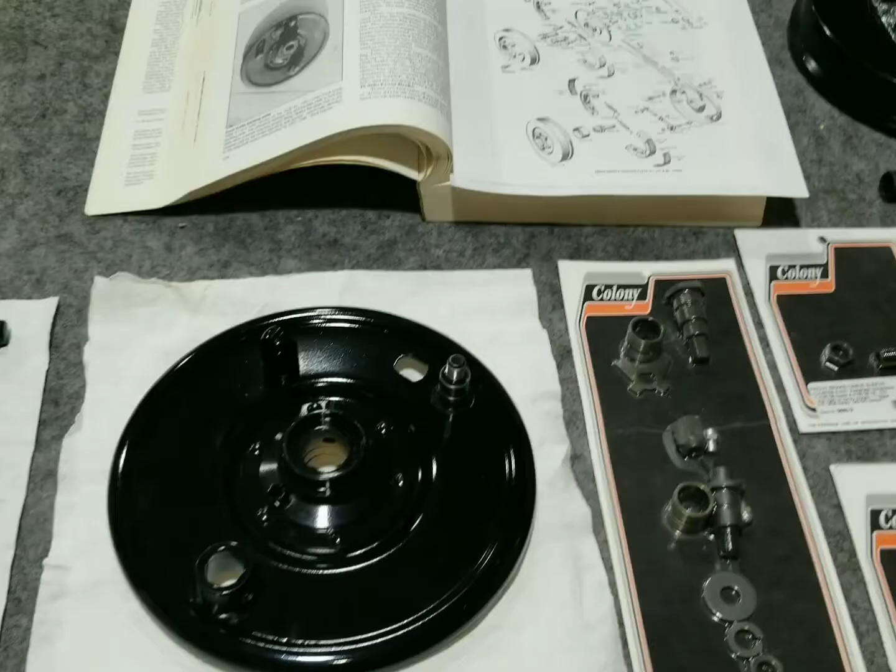Hello, it's Jesse here, and we're going to work on a front brake assembly, mechanical front brake assembly for my 1940 UH. So stay tuned here as we get ready to put this together and get it ready for the bike.

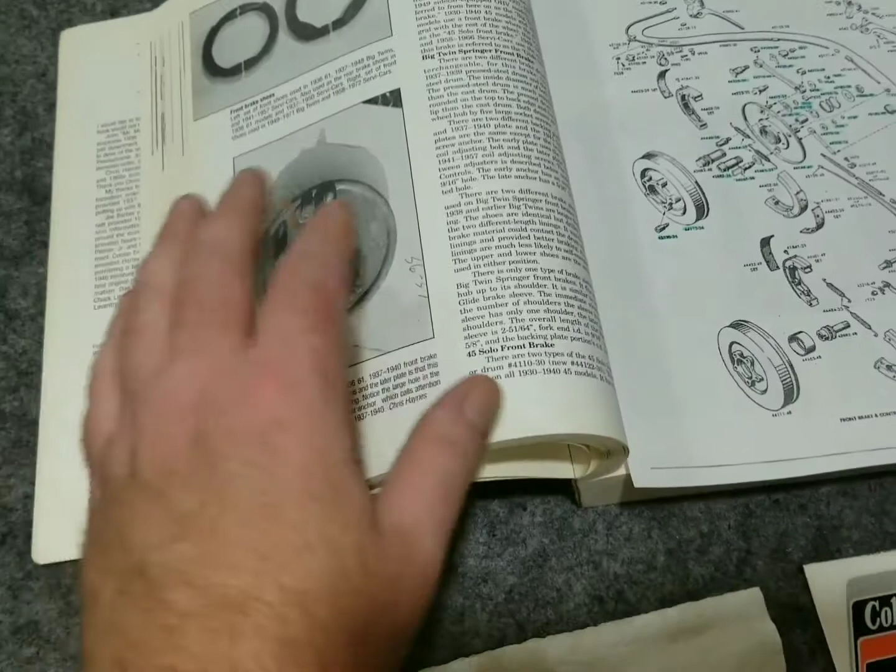Alright, so talking about the parts here, we got the backing plate. This is a repainted 1938 to 1940 backing plate. And the reason why it's 38 to 1940 is because in the Palmer book here, it talks about how later in 38 they added this greaser part here. Because in 37 it didn't have that yet. In 36 it didn't have it either.

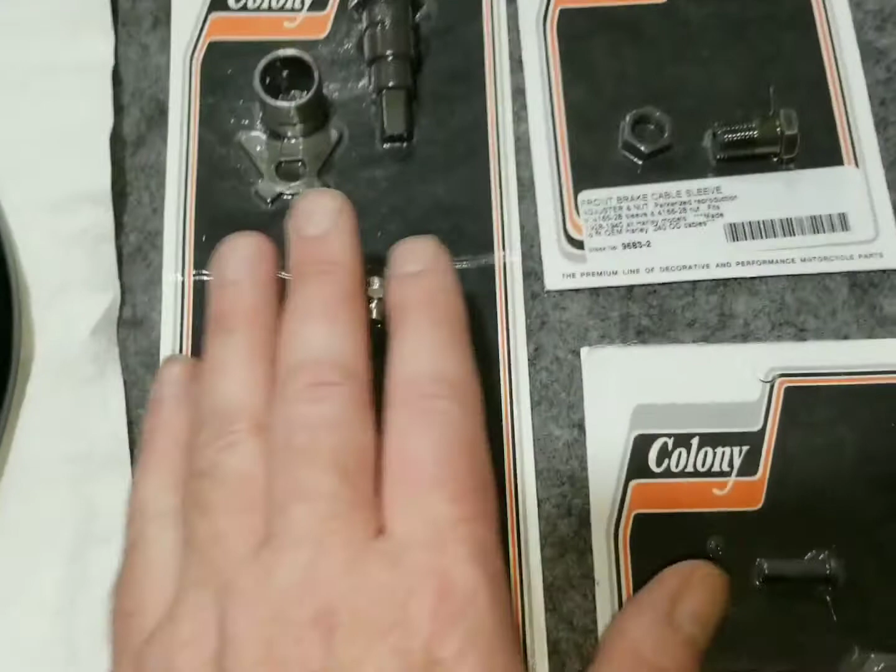But anyway, this is the 38 through 40 because this hole here on the anchor is the large one. There's a smaller one for the late 41 and later because, as we see here in this parts print, this is a 41 style anchor part here for the cable to go through. So the 1940 takes a different one. It takes a larger one here. Got some other Colony parts kits here we'll be talking about as we go through this.

And I guess to kind of overview the parts here, this is the shackle. This is the spring and the seal and washers and stuff that go inside of here. Also we have mechanical brakes, so we have the cam here that pushes the brake shoes open. This is called a mechanical brake because it takes mechanical advantage to make it function, unlike hydraulic brakes, which take fluid to make them function through a piston. And those are usually called juice brakes or whatever slang term you want to use.

But mechanical brakes are the same kind of brakes that are on semis and stuff, where they take an S-cam on the air brakes that opens it up and then closes when the mechanical air brake drum functions. But anyways, this is a little bit different, of course. It takes a rod that functions the cam, which is pulled by a cable. So anyway, we'll be going over this as we build it.

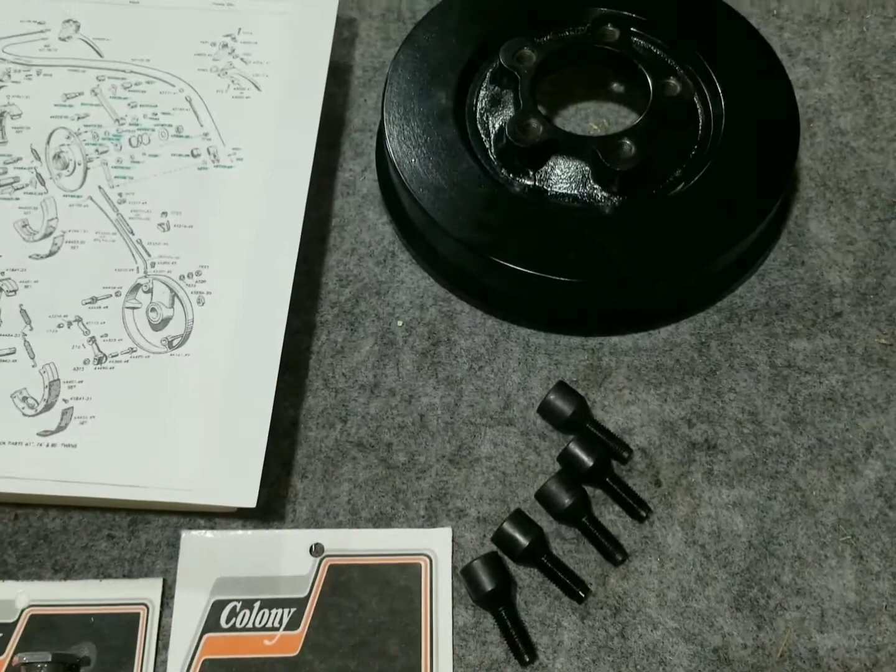And then I got a new replica drum because the one I had was gone and worn out. And then we got the bolts here that hold it to the star hub, which we'll be building a wheel with later in a different video for this front, with the rebuilt star hub wheel.

So anyways, let's get started here. First of all, we're gonna work on putting the mechanical stuff in, like the pin here that goes here for the bottom part on these. This is actually considered the top though, but I got it sitting towards the bottom, so it'll sit in there like this. It pivots on this pin here when it functions. So when this thing rotates, it presses it out. So anyway, let's get started here.

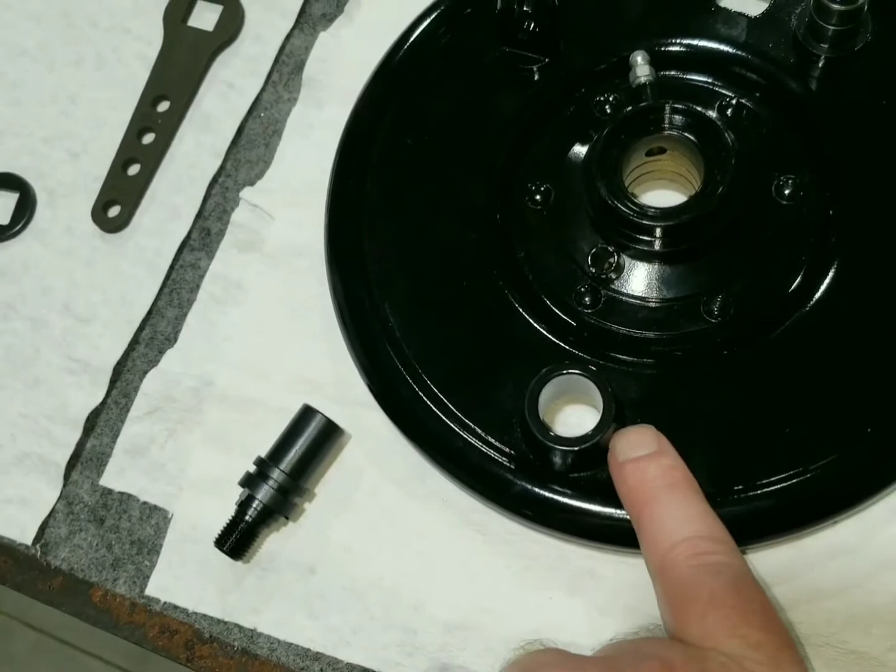Alright, so we'll start off by just putting these grease zerks in here. We'll put the one in here like this. This is the cadmium one, replacement, reproduction by Colony. And then we have one down here on the operating shaft bushing housing. So we'll put that one in there.

Now when I put the new bushing in though, I had to ream it a little bit so I could get this operating shaft here to actually function inside there. Goes the other way though, but just showing you that it cleaned out. Got a little overspray inside here, so I cleaned that out too. And then we'll just flip it over here. So I got all the parts highlighted that we're going to be using here. It's also another guide for me to keep track of all the components I needed to purchase so I could rebuild this front brake.

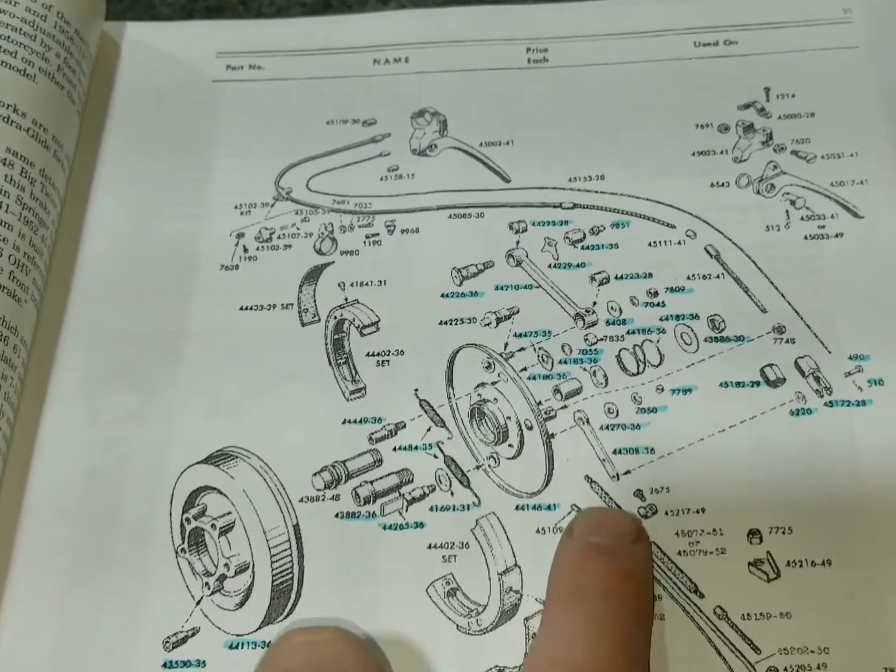So, seeing how we're starting down here with the cam, and then there's that brass washer that goes there, and it goes into the plate. Then from the other side we get the lever, this style washer, spacer, and then a lock washer, and then the hex nut. It's all Parkerized parts for 1940, so keep that in mind. It also tells you which way to put it on. The outside, of course, is pointing to the outside of the backing plate. So there we go.

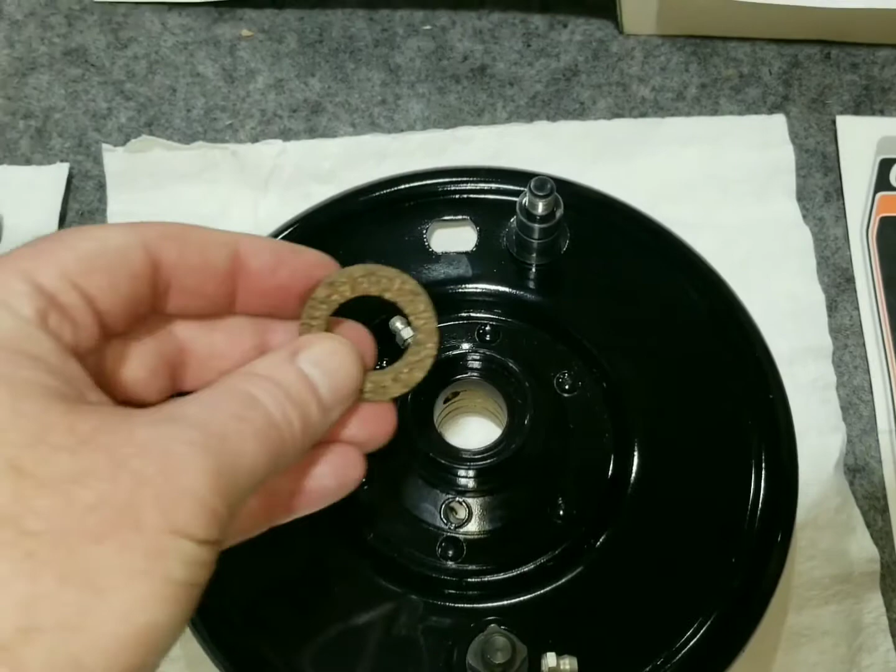And then I'll flip it over. We're gonna leave this stuff kind of loose for right now. There's some stuff I won't be totally assembling at this time, because it has to happen later when we put the axle through the wheel, like the spring that goes on the outside here, and the big washer, and of course the cork seal that keeps all the grease inside there. So, anyways, it just goes on like so.

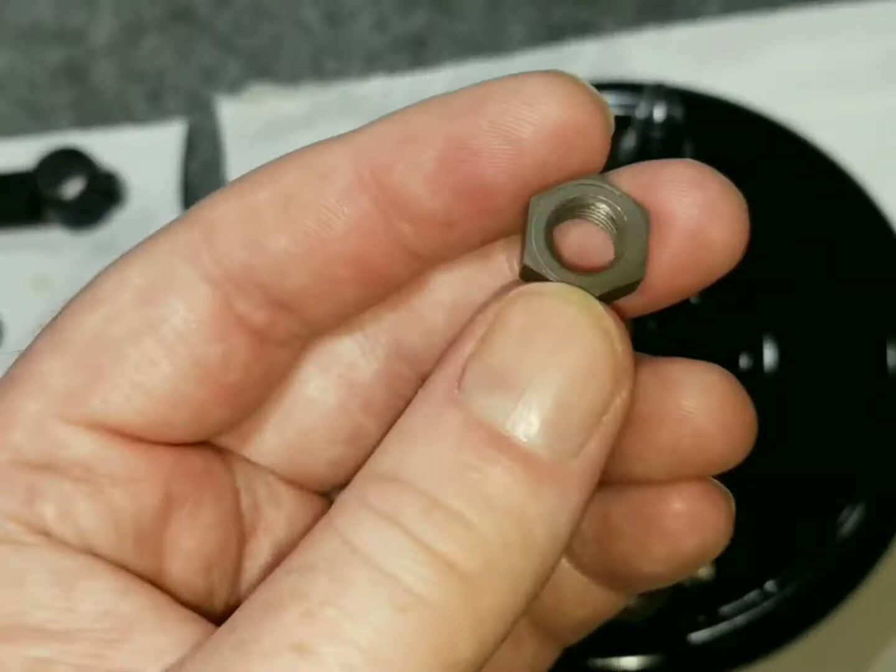And then we put it on; it's kind of a little bit of a press fit on this one, and then we put the lock washer on and the hex nut on. Of course, this has a machined surface, a built-in washer in it. We've talked about these before in my other videos, but that goes towards the component you're tightening down, so that would go towards the lock washer, of course. We'll leave that somewhat loose for now. There we go. And now we'll move up to the pivot pin here.

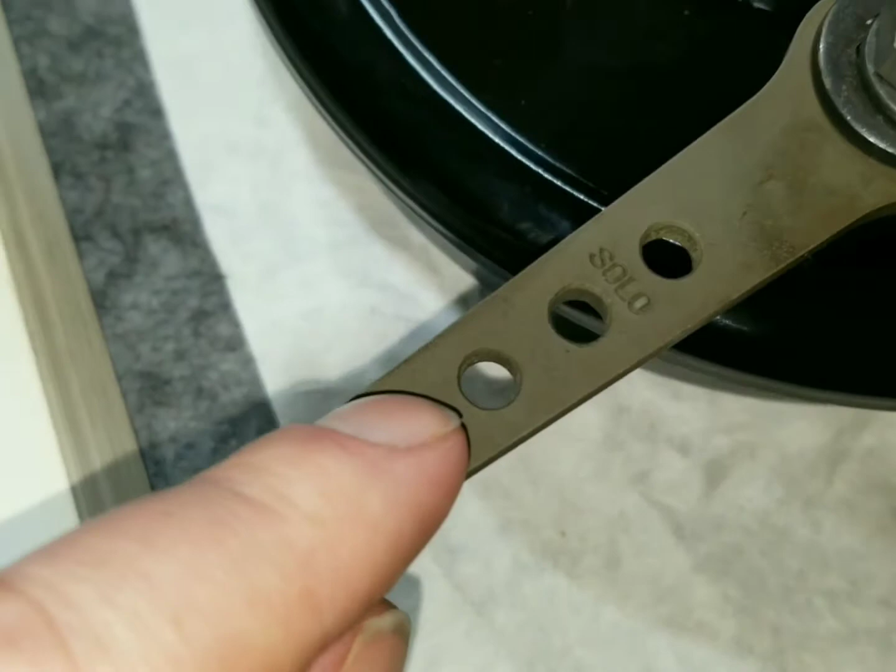The front brake actuating lever. I kind of forgot to talk about this. I just got carried away with putting it together. So this is the early style from 36 to 1941, big twin one. It has the 3 holes for the solo area here, and then the sidecar one on the very tip here. Now this is a real original one, Parkerized, and they all were Parkerized, but anyways, this is how you can tell: the script. Aftermarket ones don't quite look like this.

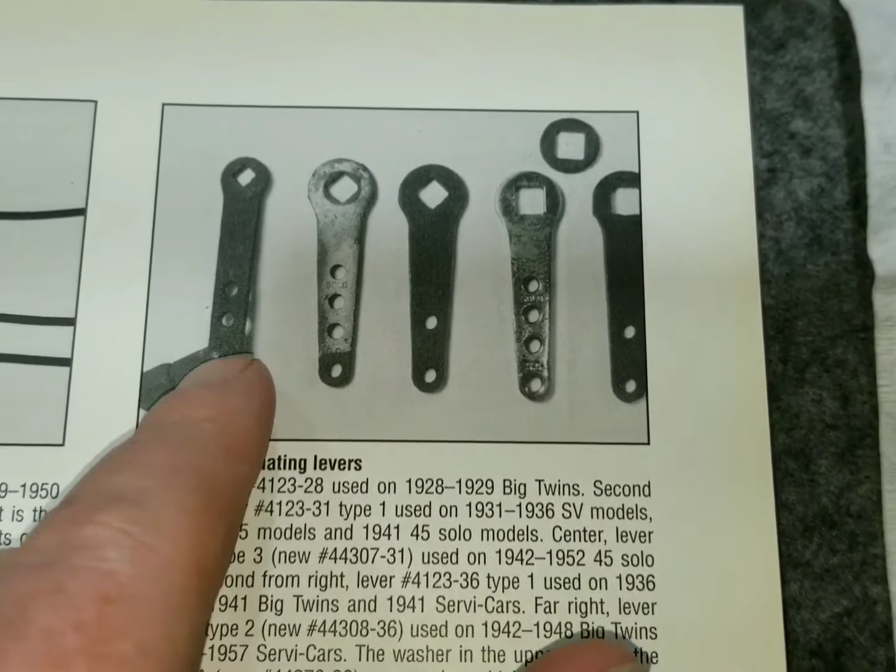What makes them different is the 45 had 2 holes, and the part where it mounts was different. So over here in this Palmer book, we show all the different ones. First off, it talks about how this one here was the 28 to 29 big twin, and this one here was the 31 to 36 side valve models, and 37 to 40 45s, and 41 45 models. See how it's shaped this direction, and how the one we just put on was like this.

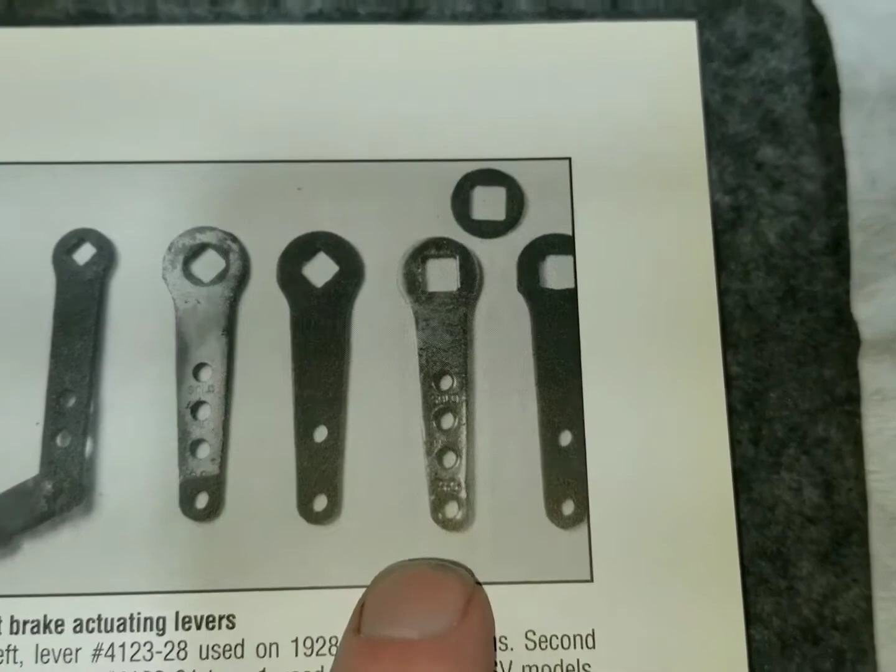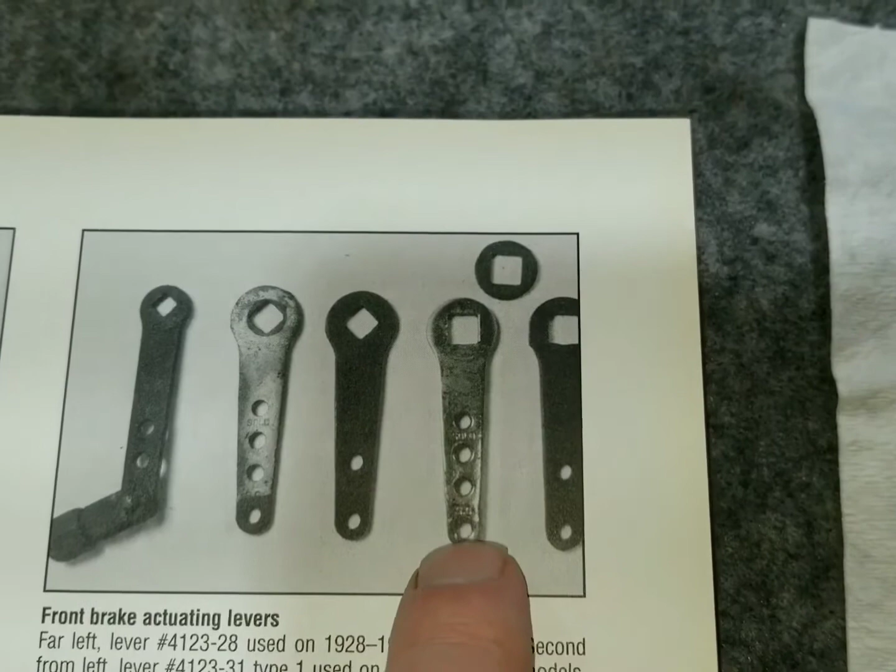Okay, so here we go. We're going to go into detail here. So then the later Type 3 on 1942 to 1952 solos, 45 models, went to this style with the 2 holes, but with square holes and this orientation as well. Big twins, 1936 to 1941, look like this, with the words SC for sidecar, and then solo up here. And the orientation is like this. And then in 42, they went to this style, 2 holes with the same orientation. So anyway, that clears it up a little bit. I just thought I would mention that since I forgot to.

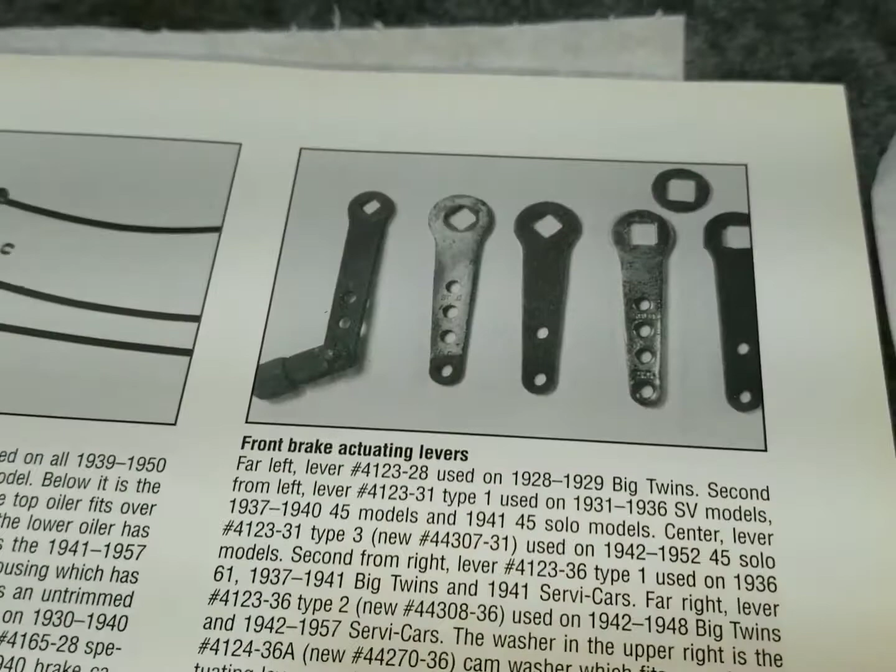So the whole purpose of having the holes is that you can adjust stopping power with this front brake. So we have the ability to put the lower connecting unit, pin it in here, in any position you want, for the amount of stopping power you want. A lot of the times I would see some of these bikes out there with it at the very tip here to have full power out of this front brake, because it doesn't hurt to have a good stopping front brake.

So what happens is we put that retainer piece in here, thread in the cable, and then the cable itself comes down here and hooks to the lower connecting unit, and you'll see all this go together when we start setting it up. I think I'll probably end up setting mine somewhere around the middle, and then I'll probably end up moving it someday out to here, because then I have the option. But anyways, that's all I really wanted to say about that. I forgot to mention it. So stay tuned as we keep moving along on this front brake.

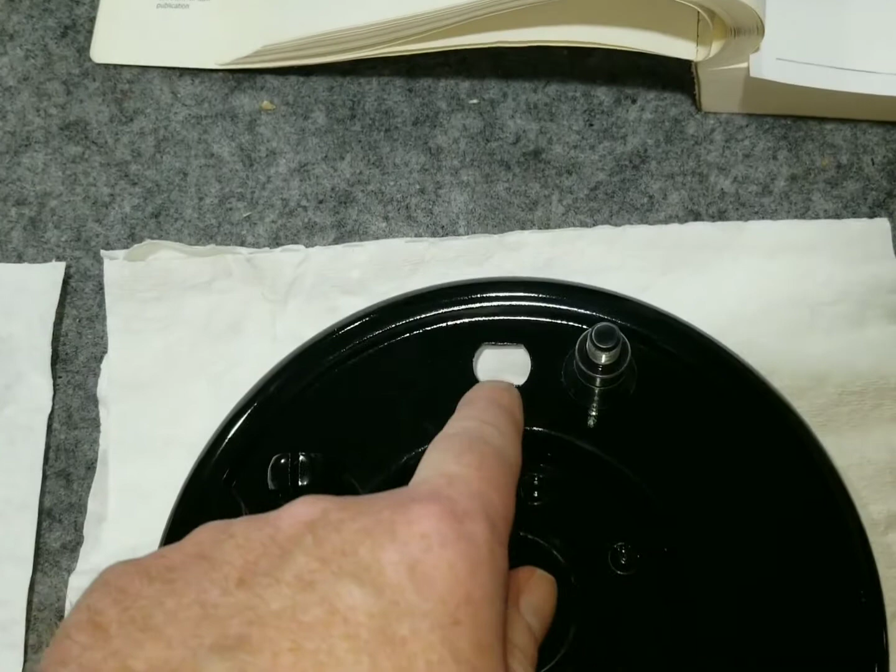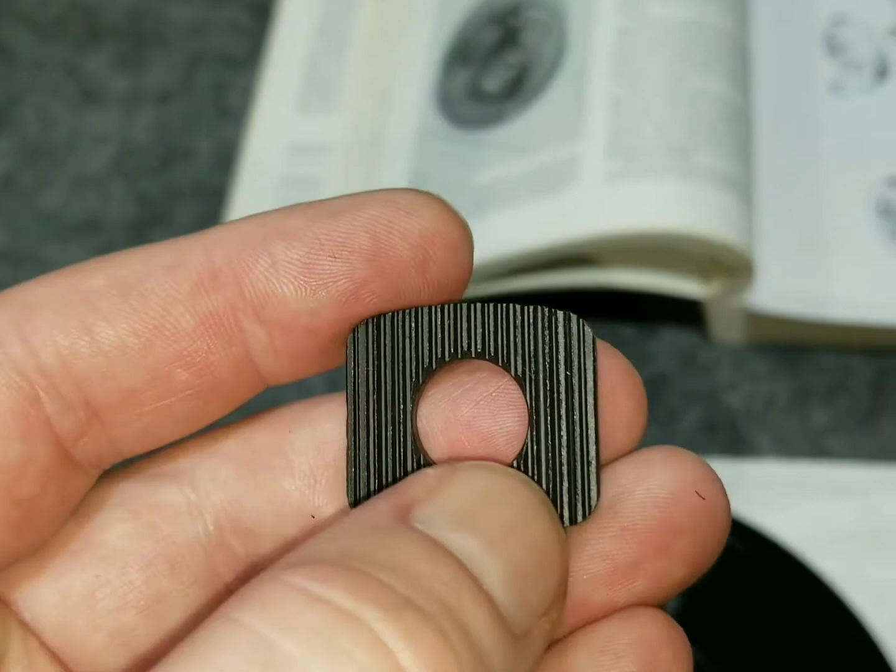All right, so for the pivot pin, it has an elongated hole here, so it's got two flat edges and two curves. This is the same way the pin is made too. It's got two flat edges and two curves. So just put it in like so, and then rotate it till it falls into the grooves like that. And then we have the locking plate. The locking plate has grips on it to help tighten it up to the surface here. So you just put the gripped or grooved edge towards the plate, and make sure it's nice and centered in there.

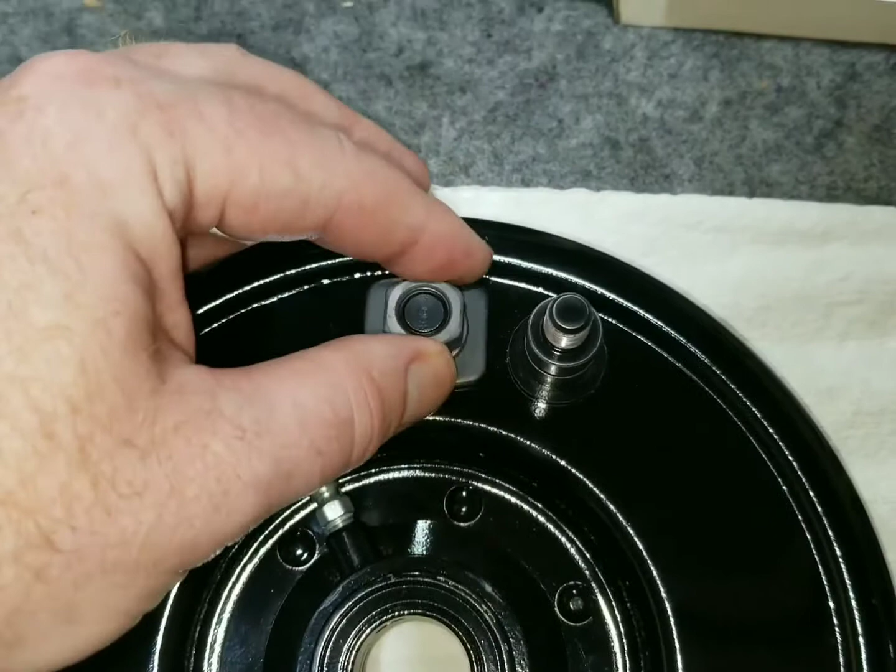Then we put the lock washer down, and then the hex nut the same way, machined edge down. We'll just engage it a little bit for right now. I'm not sure if I'm going to use Loctite on these or not. Maybe I will. I'll put some blue Loctite on when we go to tighten it down. And then we'll flip it over. And now we set up the shoes. All right, so stay tuned.

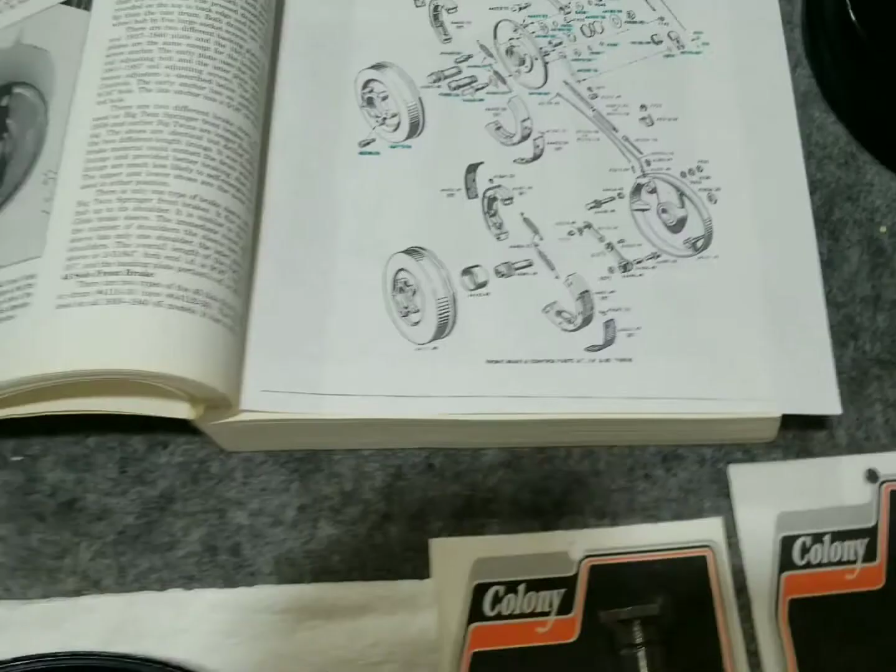Okay, so I'm with the brake shoes here. We got the springs here. We got one end of the spring hooking upward, and then the other end of the spring hooking downward, and the same with the other spring on the bottom here. Now we're going to set it up just like that, and the factory book here shows it that way as well. So we're just going to do it just like they did.

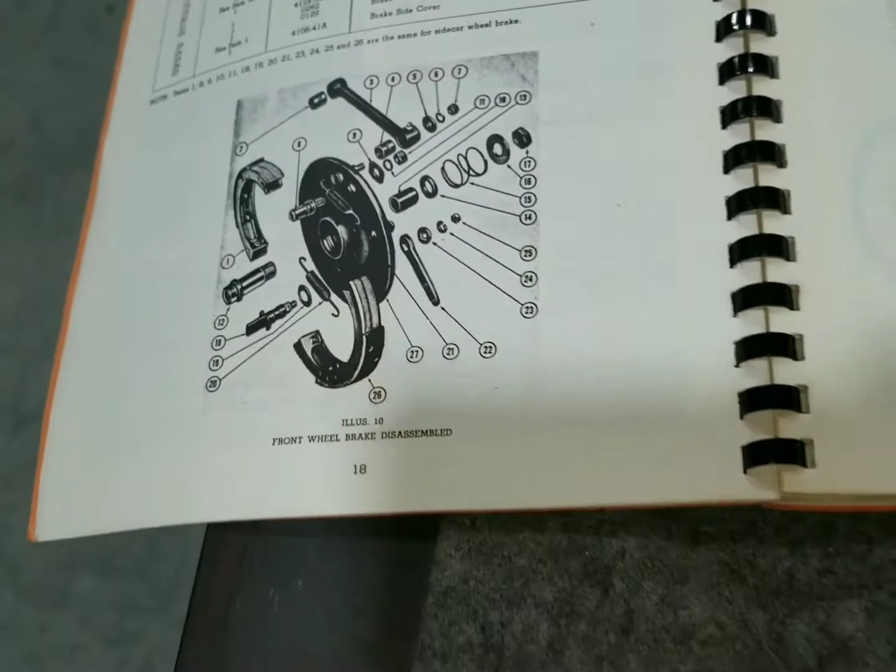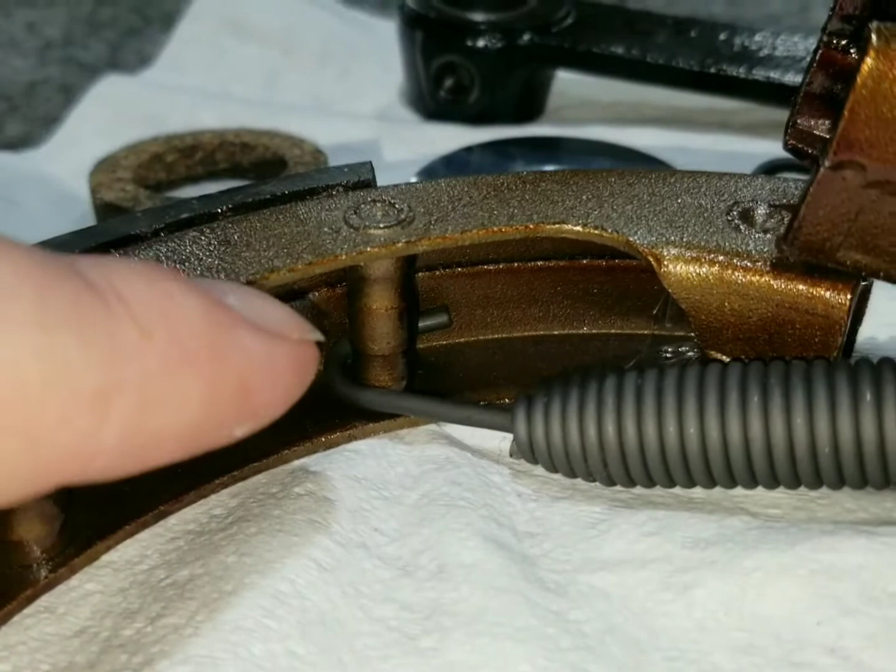So we'll do this side going down, and then we'll bring it over and hook it up on this side going up. Now inside there, where these hook to, there's little indentations where the spring hooks into and sits. Make sure it's fully engaged on that one, and the one on the other side matches it. Otherwise it would pull kind of crooked.

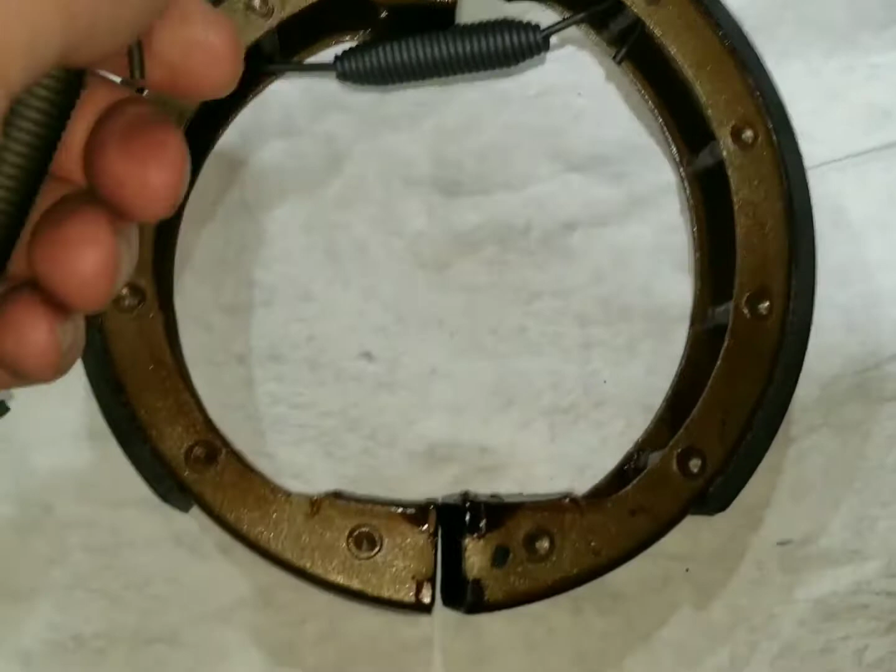So now same with the bottom one here. We're going to go opposite. So we're going to hook this one on this side from the bottom going up, and this one from the top going down. So I'm going to bring it in closer here. There we go. All right, now we just spread them apart and put them on the backing plate. So stay tuned here.

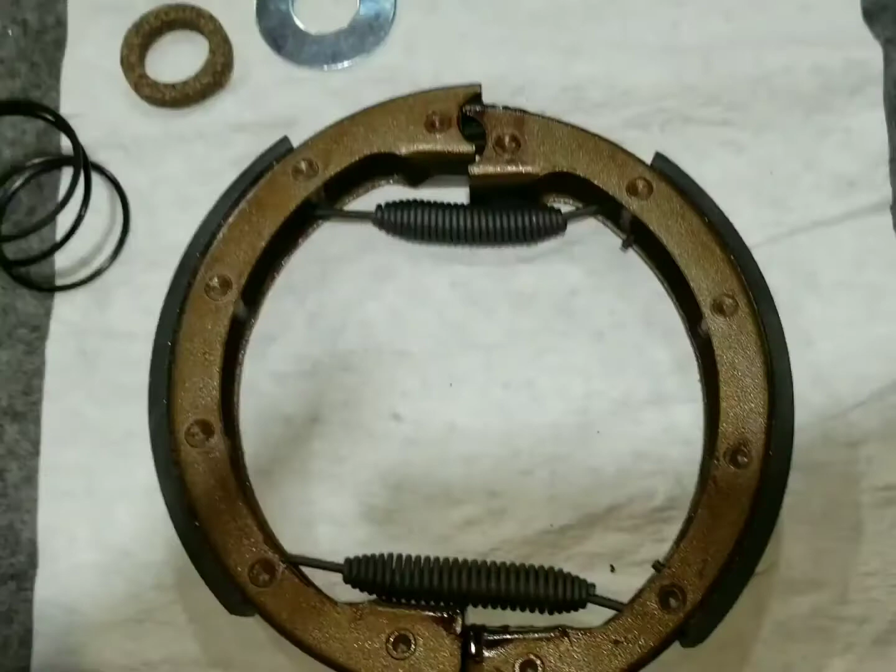All right, so all I did was use both my hands, and I pull them apart so each end could touch here. And then we'll work on it again with two hands, and we'll take it and set it onto here. Now on the top here, it's got an indented area where the circle part goes around this.

So now I'm going to make sure that one of these edges, the back edge there, engages in this groove right through there, and then the other top half moon sections here will be flush on the top here. It's got to be in that groove. We got to make sure it's in that groove. And then, of course, this end here that sits on the cam just sits flat up against it. So, stay tuned here.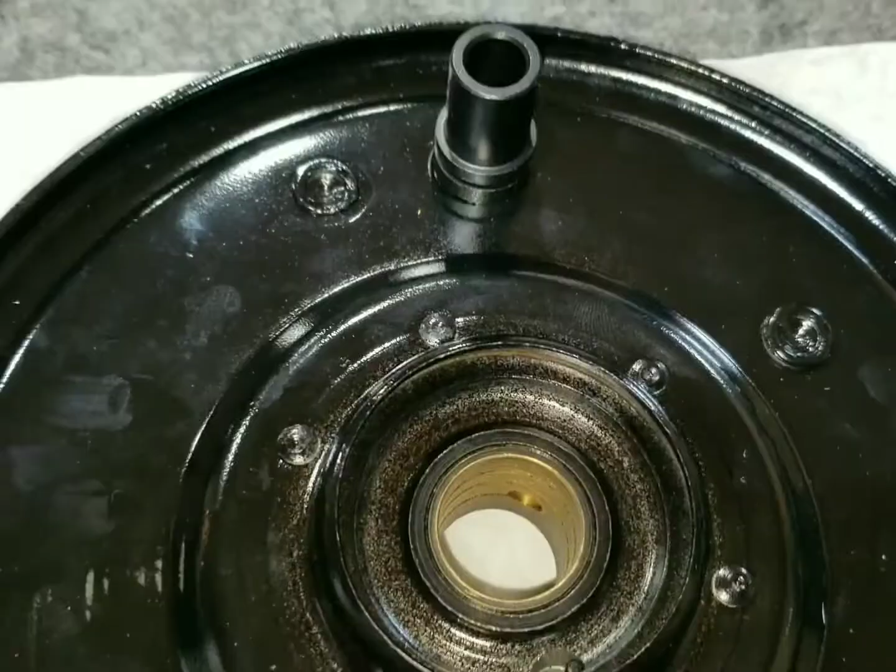Alright, so before we get carried away with putting the brake shoes on, we want to make sure we have some slight amount of grease here, just to reduce the metal-to-metal friction on the pivot bolt here and on this cam here. So we're just going to take a little bit of this moly grease right here and just touch the edges here.

We don't want too much grease on these brake systems, because this stuff moves around and gets on the pads. It can be a real disaster. So yeah, it just won't function. So anyway, here we go. Just to keep the metal to metal friction wear from being excessive.

So later we can come back and we're gonna grease this through the zerks later when we get ready to put it on the bike. We'll hit all the grease zerk points at that time, and we'll get some really good lube inside there. Alright, so let's move on to putting the pads on.

Alright, let's see if we can do this. So, spreading the top apart, going down there, and then we're going to pull the bottom apart here. And then there's that groove. Now we got to pop it down through there. Alright, there's one side, and then there's the other one. There we go. And we got it.

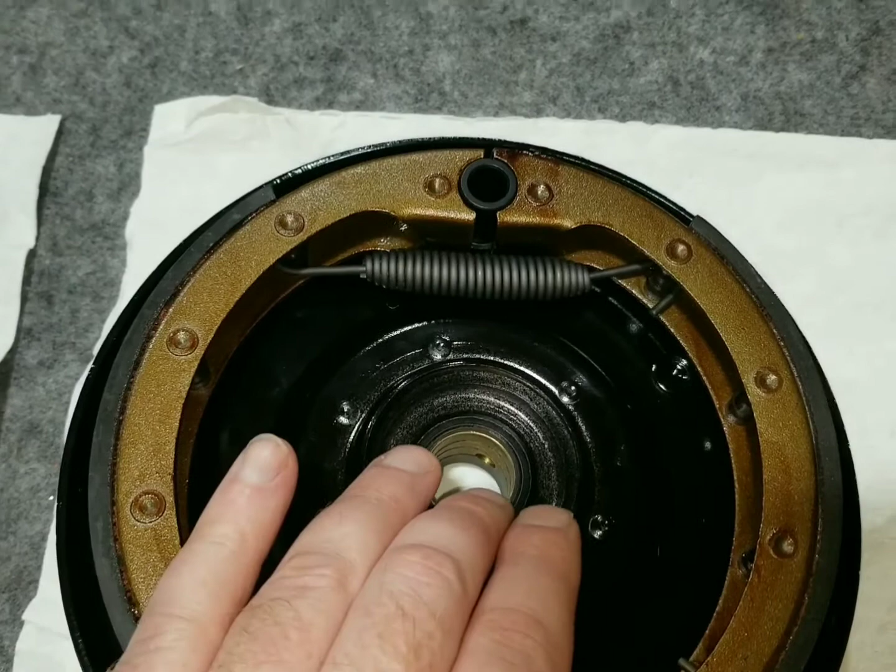Alright, so now that this is all on, we're just going to put the drum on for now. It will just keep it from falling off and all that stuff. So it's not a big deal if we do this or not. It's just that it's going to sit for a little bit.

I'm kind of at a standstill on working on this bike, so I'm kind of doing this, preparing sub-assembly stuff right now in the meantime until the lift opens up, because we got some other stuff going on also. So anyways, there's that. Now we just flip it back over here.

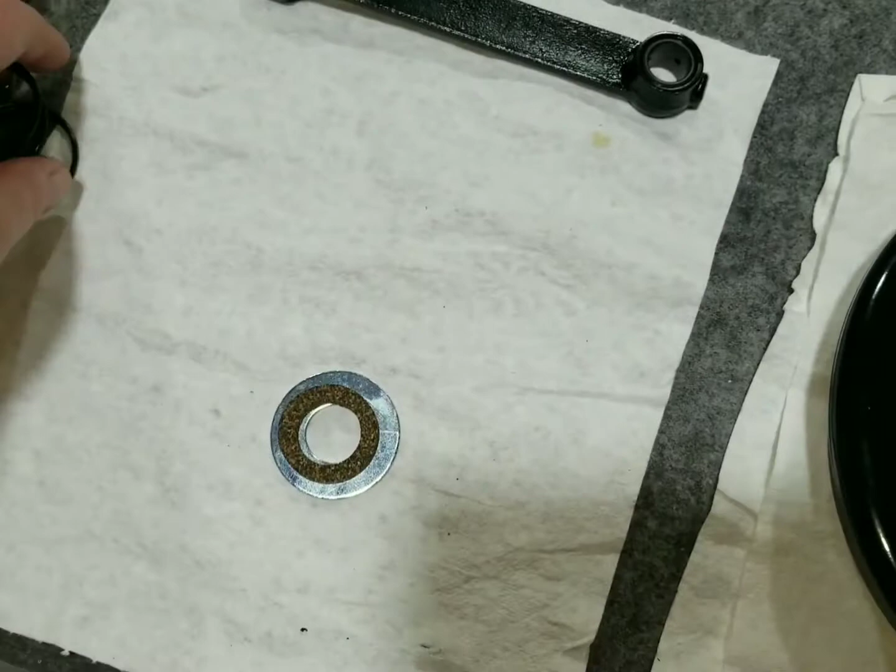Alright, so now we're going to tighten these guys up. Then we'll start digging into some of this stuff here. But in the meantime, these parts over here, I'm going to put them aside for now. Like I was saying, these go on when we put this all together onto the front end, which is hopefully coming up here soon. So anyway, we'll tighten these up, our grease zerks.

Yeah, we'll probably use blue Loctite on the top pivot stud nut, and then blue Loctite, of course, probably on this actuating cam lever nut. So, yep. All right, that's tight. And then we'll talk about some other parts like the shackle and stuff as we get into this. Okay, so stay tuned here. I'll get some Loctite here on these.

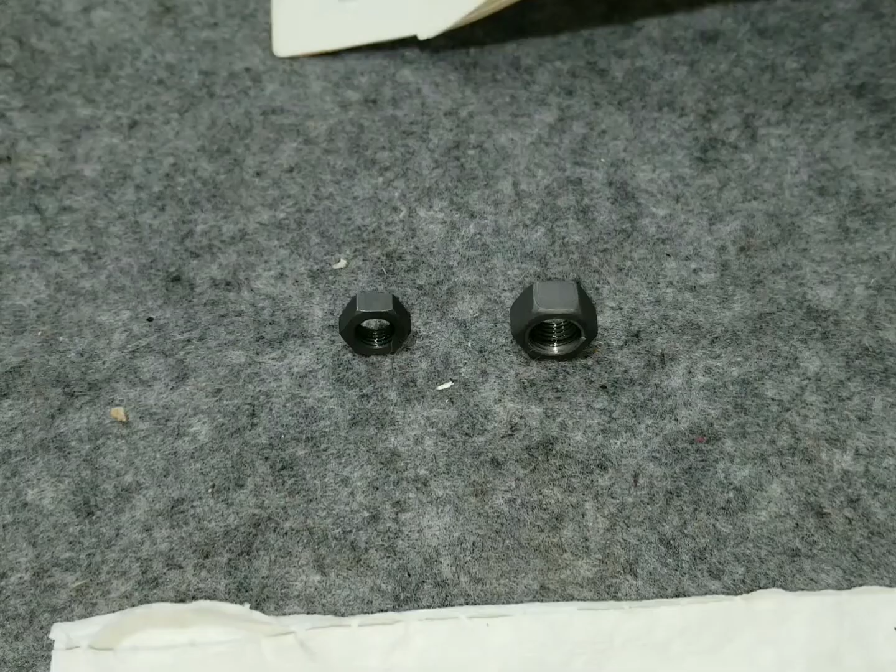Alright, so now we're going to put some Loctite on these nuts here. And the book says to tighten them down securely. It's the original book over here. I think I'll just tighten them down to like 20-25 foot-pounds. And then we got the Loctite helping hold it, so it's not a big deal.

So just make sure you got them on the right way. And then turn them down. And then you got this backing plate, lock plate here. We want to make sure this nice curved edge here on this plate kind of matches the curved edge of this backing plate. So it wants to kind of turn sometimes when you do this. So we'll start off kind of slow here and then kind of adjust it so when it does start to turn, it kind of turns in with this when it rotates.

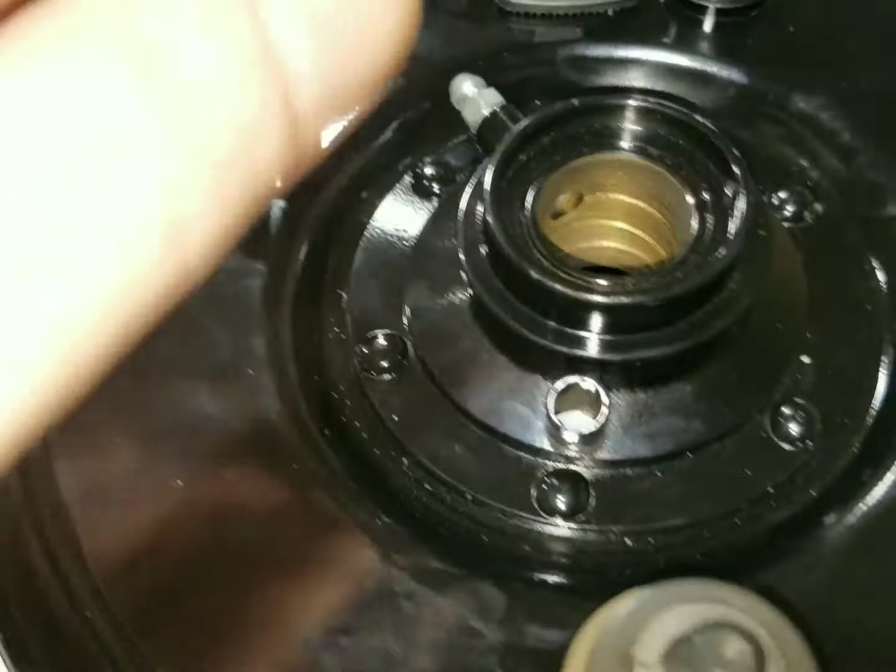I think that looks pretty good like that. Alright. So I was keeping it from turning as I was doing that, holding it and kind of turning the nut at the same time. There we go. Now it's ready to be tightened down the rest of the way. Alright, so now for the other side. Make sure we got it together right. Yep. Machine edged in. Yep.

And then we got that square washer, that special washer that has that square hole in it. It's getting pushed down as we go to tighten it up. And I can kind of feel it going in there. Yeah, it's set in there. Alright, so now I get the torque wrench out here, and then we'll torque it down, and I'll get the excess Loctite off of here.

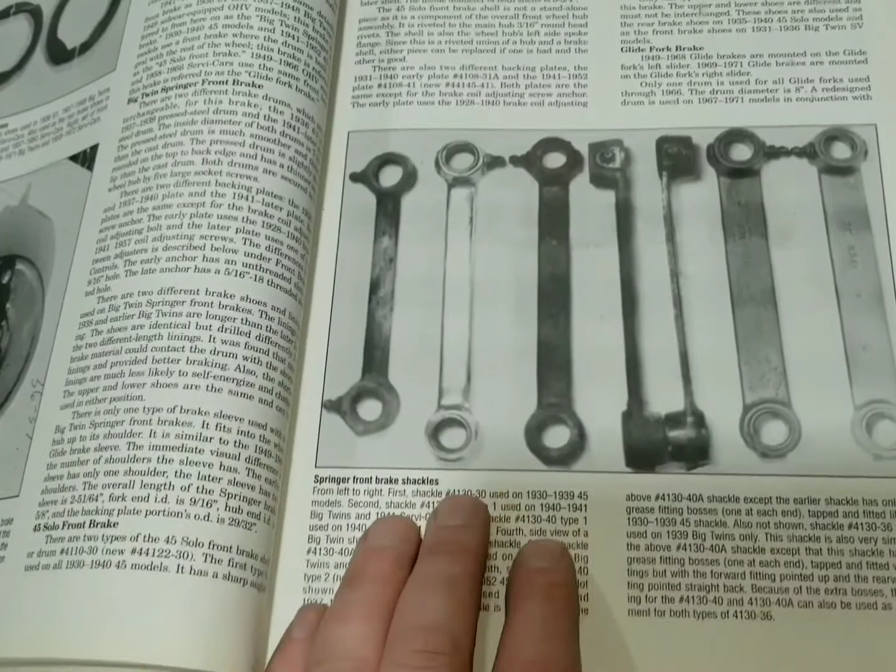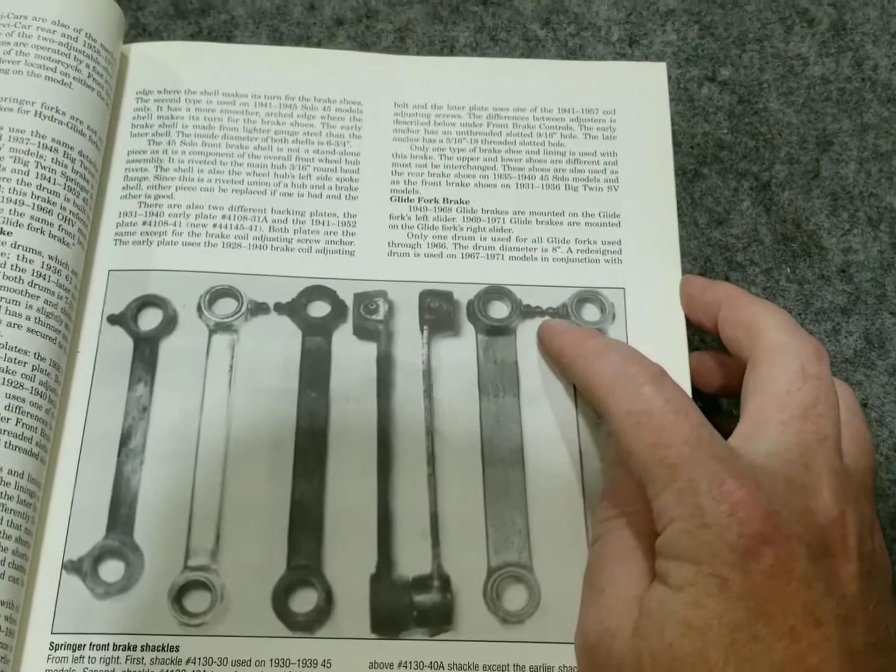Alright, so onto the shackles here as we're working on this front brake. In this Palmer book, there's a segment on the Springer front brake system, and a section about the front brake shackles for the Springer front end. So we got two different styles that were available in 1940. We had the narrow one, the XF-834. It was considered narrow compared to the later one that came out on 41 and later Springers. In 1940, they decided to flip the grease zerk to the top instead of the bottom. So that's why you can sometimes find two different styles.

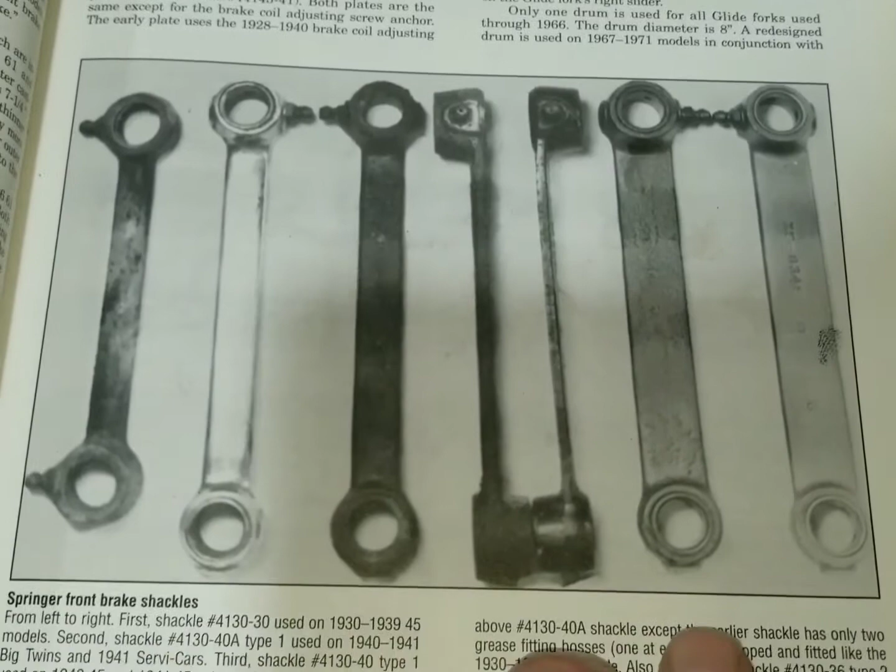It took a lot of research to figure this out, but it was vaguely mentioned in this Palmer book. As I was looking through parts and other documents, I was coming across some stuff. So we have everything listed here in this picture from the 45s and earlier ones. Here's what the narrower one looks like. And this is the 40 to 41 style. And then the narrow one with it on the bottom, this third one in the picture. And it goes on to where the later ones got thicker, like 42 and so on. But for some reason, we had some on the bottom too.

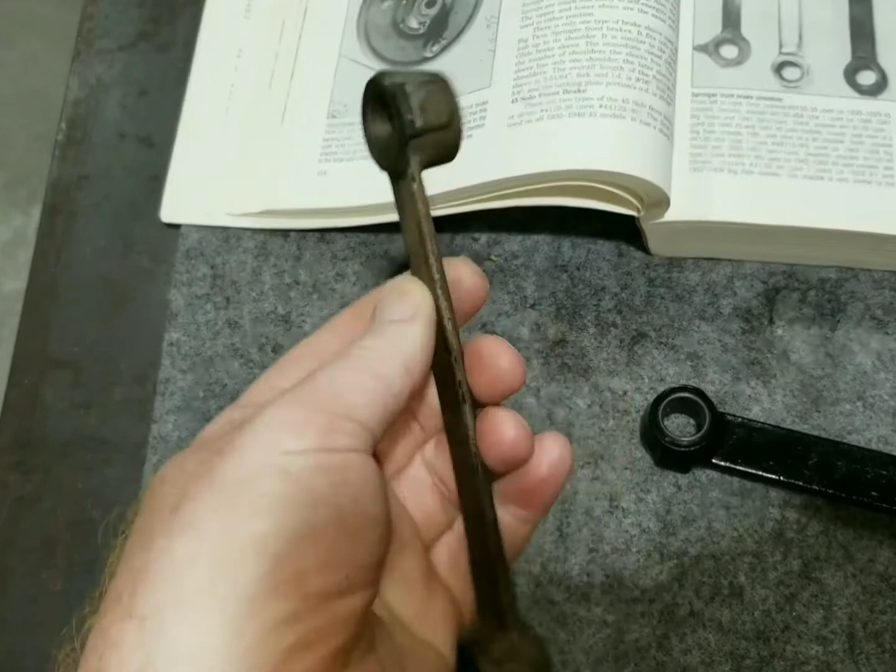So, I got two different ones here to choose from. I got the narrow one, looks like it belongs on my 40. It was with that front end when I got it. I'm probably going to restore this one and use it because it's in really good shape. It's straight, and it's pretty accurate. The bushings are kind of worn, so I'm going to replace them and put a new grease zerk in the top here, then repaint it, of course.

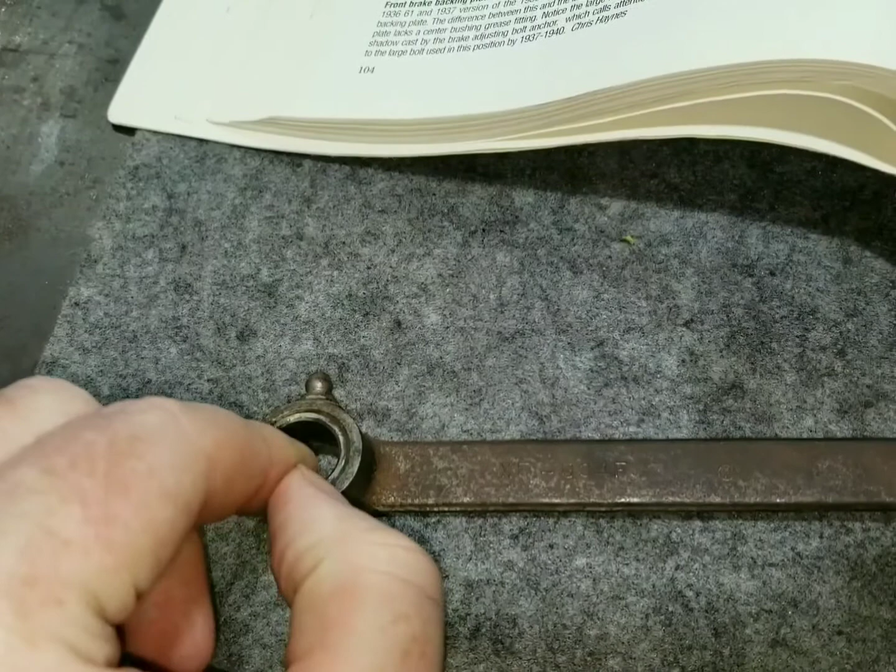And this other one here was the thicker style, which came out later. They're next to each other so you can see the difference. And it has the grease zerk on top as well. What makes this stand out as the right one is that it has an untapped boss on this side for a grease zerk, and on this side it has it as well, but they put it on the top because when it mounts to the backing plate, this would be considered top, and this end mounts to the fork.

We'll be going over that as we keep moving along, but in the meantime, I'm going to work on getting this cleaned up and repainted, and then we'll reapply it later in the video. But at the very end of it, it has an untapped boss as well.

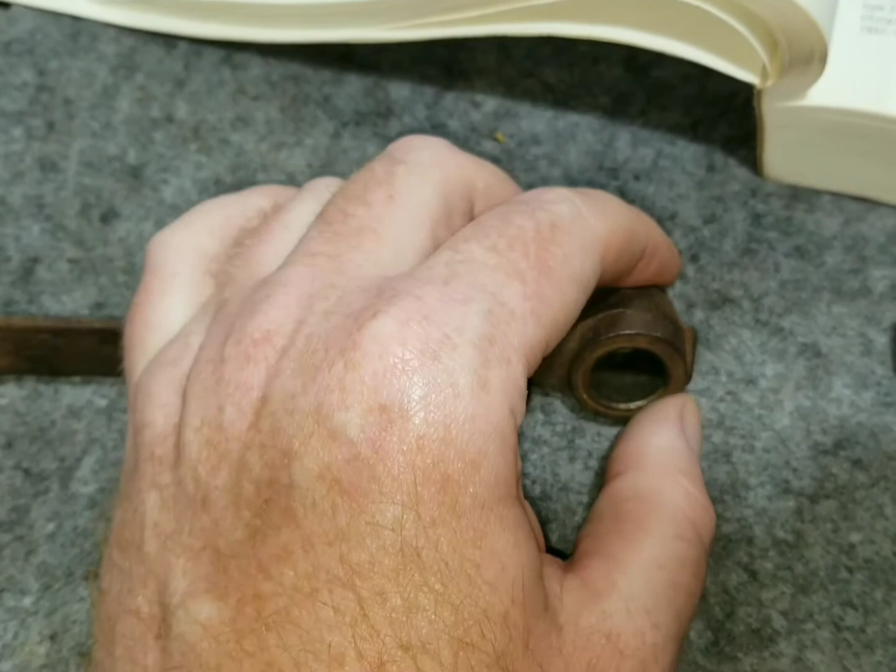Anyways, there's a pin that comes through when it mounts to the front end, and it has a part that screws on. But anyways, we'll see that when we come up. Coming up here, we're going to work on the Colony kit here. I'll have it all laid out. I'll show you all the different parts there. And then we'll get this all cleaned up and get it on the front brake assembly as we keep moving forward here. Stay tuned.

Okay, I have 3 Colony kits laid out here that I just opened up. The first one here is this front brake shackle rebuilding kit. This kit contains everything needed to restore the front shackle on all Springer front ends from 1940 to 1957. It's good for big twins and 45s. In 1949 they were still making the big twin Springer front end for all sidecar models, and then the Springer front end was still on the 45s all the way to 1957.

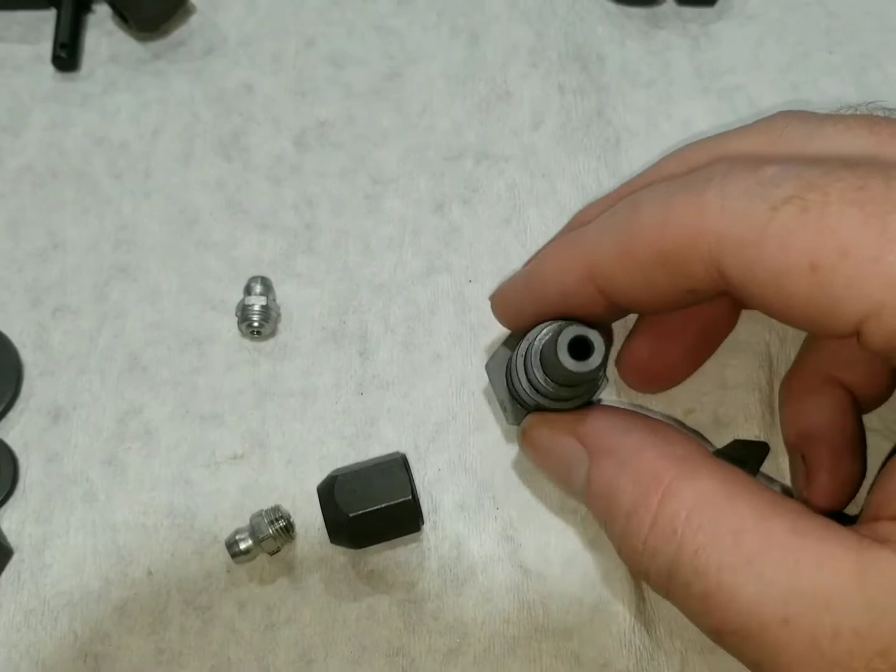This kit contains a flat washer, lock washer, and a hex nut to hold the front part of the shackle on, a new grease zerk for the shackle itself, the hardware here to hold the rear part of the shackle to the front fork. We got a new bolt here in Parkerized finish like it was originally, the nut to hold it down, a grease zerk to go in it, and the special keyed washer that locks it.

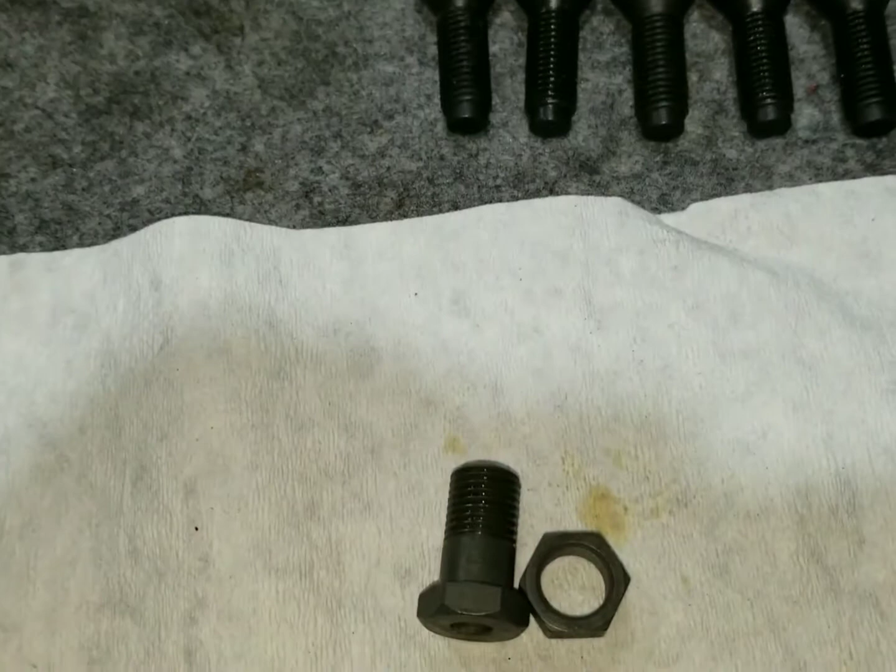So next here in these other kits we have the front brake cable sleeve set, its adjuster, and the hex nut to lock it on the front brake backing plate. This fits all 1928 to 1940 models, because in 1941 they changed it up. They made it a smaller anchor bolt like I was talking about earlier, and they had a whole different adjusting unit. I don't know if it was an upgrade or not. It probably worked better, but this is how the 1940 was supposed to look, so I'm going to put the original stuff back on it.

And the nice thing about this is it accepts the original style Harley cables. It's left-handed. This is kind of a key note here, because a lot of the reproduction cables that you find aren't wound the right direction. They're wound right-handed, and you can't put them in the original equipment. So the cable I got is a reproduction one, but it was a nice USA made one. It was a little bit spendier than those cheaper cables, but it was the way to go because it goes inside here and threads into this, and also threads into my original front brake lever as well.

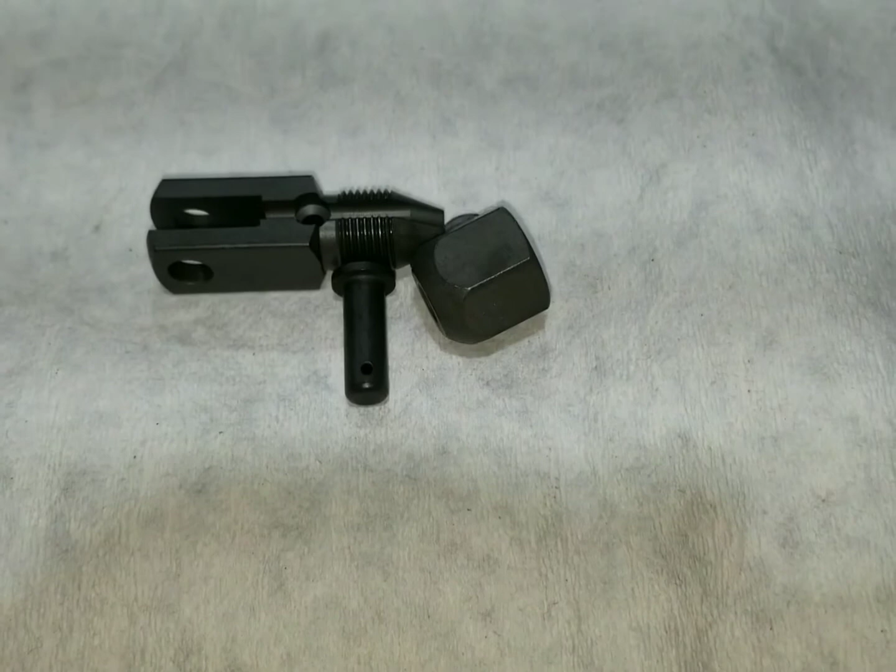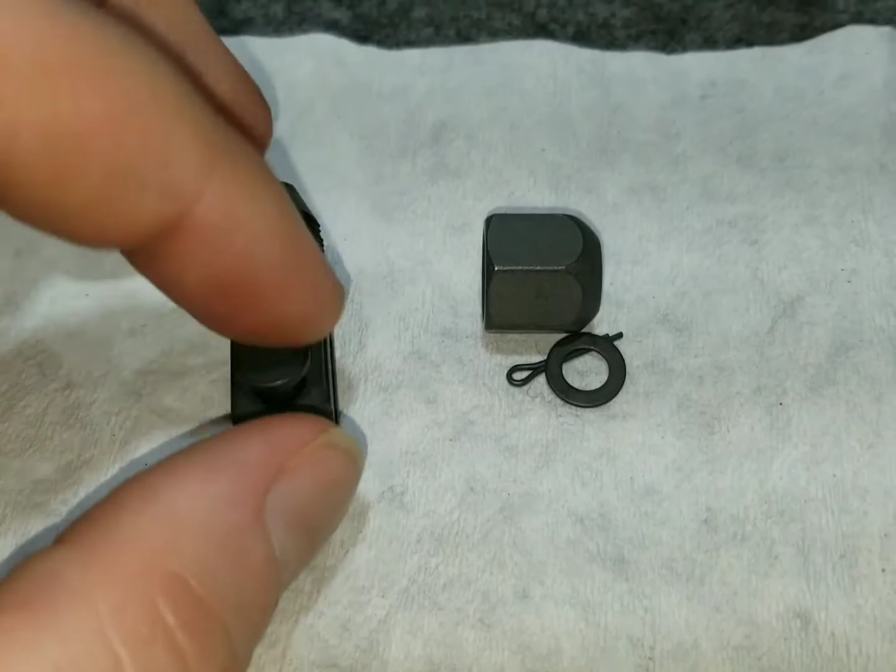So that's really good. And then the other kit we got over here is the front brake control wire lower connection kit. This is a Parkerized reproduction kit of the lower connection assembly used on all 1928 to 1950 45s and 28 to 48 big twins. So you run the wire through here, wrap it around, and you tighten it down with this, after you have it hooked onto the actuating lever using this pin, popping it through, and you put the washer on and the cotter pin. You'll see all this go together as we're working on the bike coming up.

I forgot to name off the kit part numbers. So this kit here, the front brake control wire lower connection kit, is 2593-5. It's a really awesome reproduction. This kit here for the front brake cable sleeve for the 28 to 40 models was 9683-2. Really nice reproduction kit, because a lot of them get rusty, and you want them to look nice and still function, so it's nice to replace it. And then this kit here was 8010-10, the front brake shackle rebuilding kit. So stay tuned as we keep moving along here.

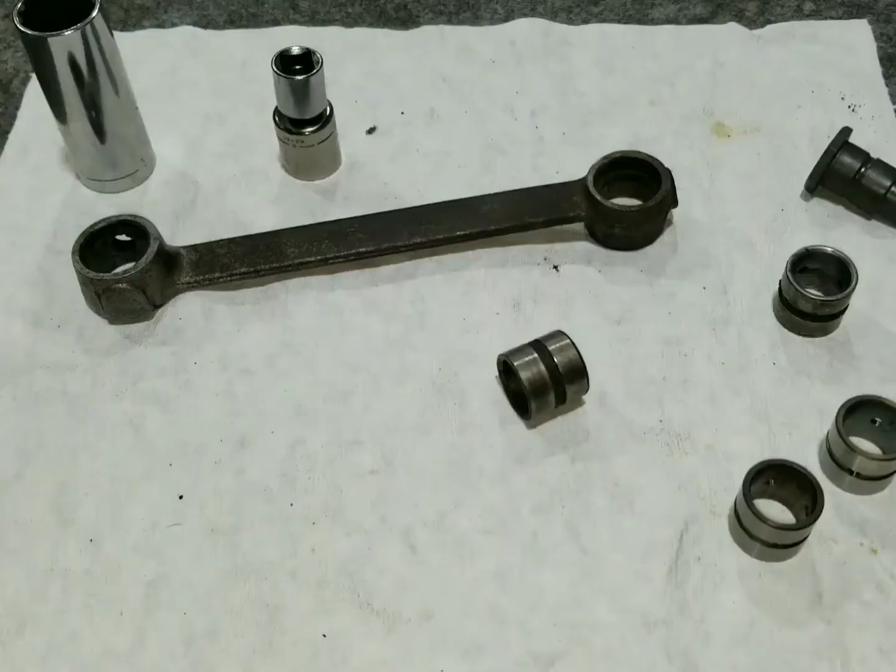Alright, so working on my original shackle here from my Springer front fork and front brake assembly. Just got to pushing the bushings out, getting it ready to clean up so I can paint it. The original bushings were pretty worn. There was a lot of wobble and side play when I put the new bolt in here, because my original one was kind of crusty and I didn't want to reuse it. Here's the original bolt, and it's pretty worn out. And the other part that had the grease zerk and the nut is pretty rusty and pitted. That's why I went with that new kit.

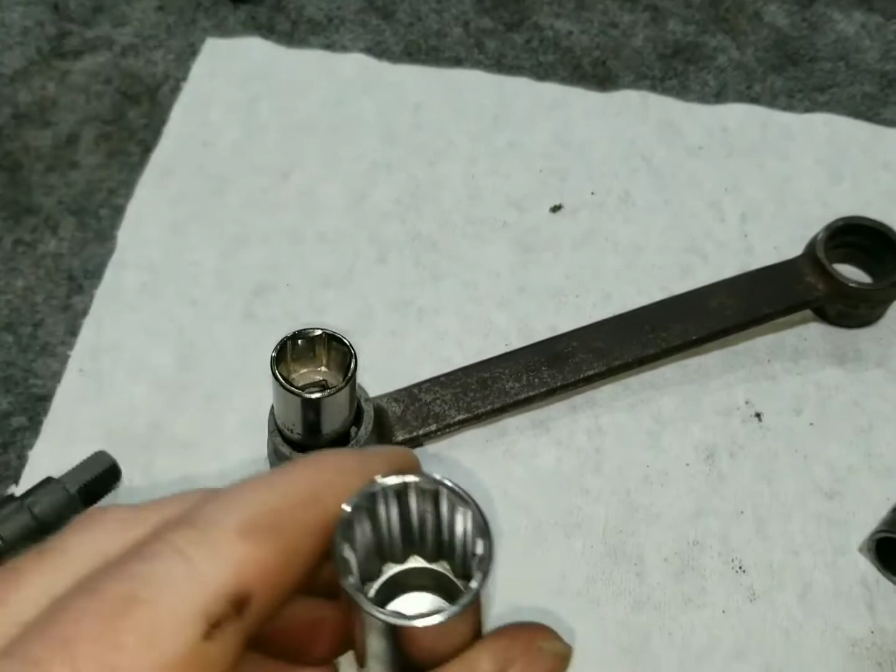It was all encaked in really fine metal shavings and grease all compounded behind the bushing here. So all I did was hook up a socket with an adapter, so I could get the adapter to go right inside there like that, and then it lined right up. And then I set it on top of here and used the hydraulic press and pressed it right out.

It was kind of hard to do one-handed with trying to do the camera, so I wasn't able to record it. But anyways, it's not a big deal.

This kit, the 8010-10 Colony kit for the front brake shackle rebuilding kit, comes with 2 new bushings, so I'll be using those in my shackle up here for my front end. Look all nice and new again.

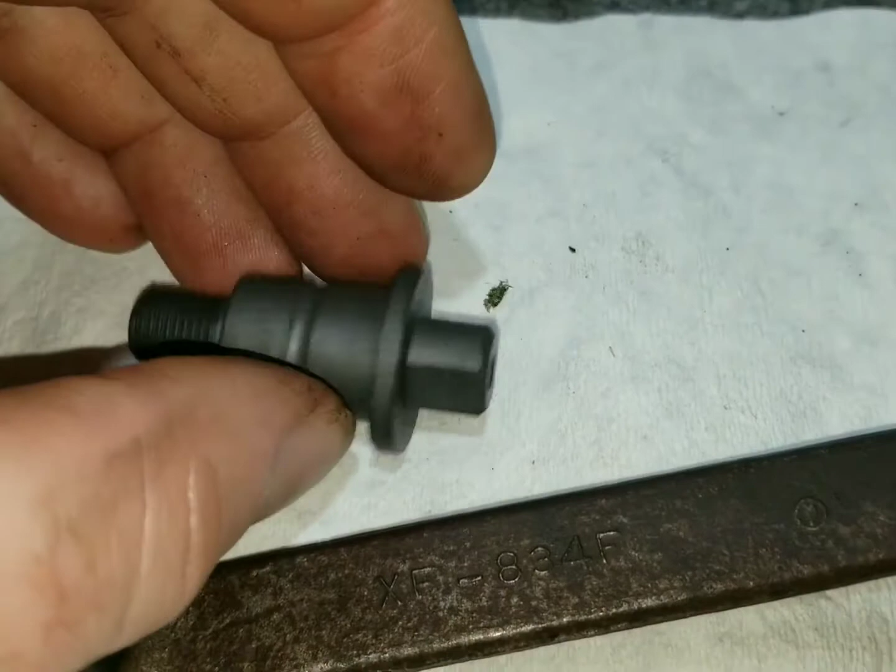And then also that kit comes with a new one of these. This is the part that hooks onto the backing plate for the front, and it's a replacement because they kind of wear out over time. Mine was in really good shape, except it had some gnarling and the threads were kind of mangled up, so I had to chase them and fix them up. But otherwise, I was able to use my original one without having to replace it. So anyways, stay tuned.

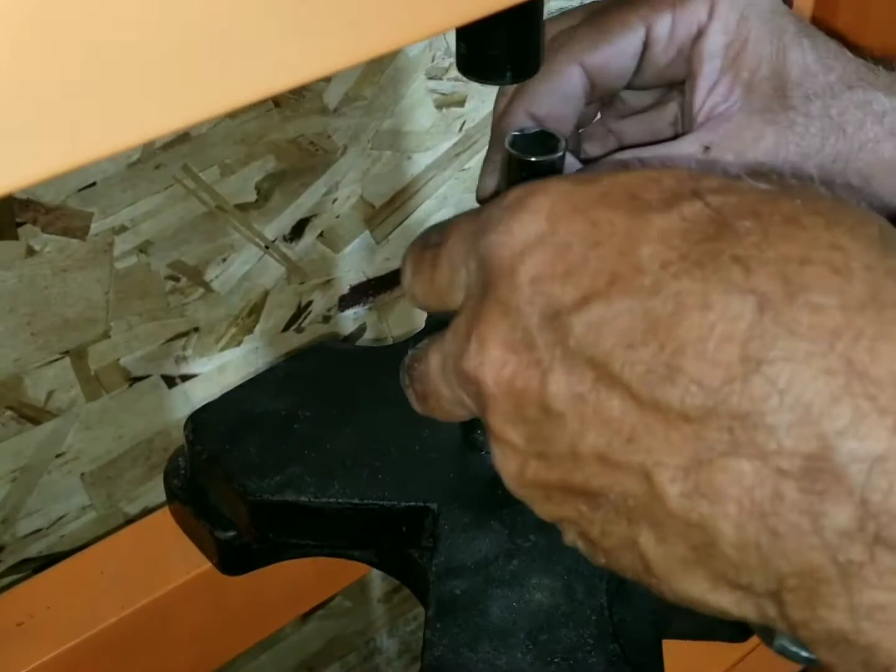Alright, so we're going to try to record us pressing the bushing back into this shackle here. So let's get started. Well, I went up too far, but anyway, I'll hold this part here, unless you got it. So we lubed it up first. These new bushings go into this old shackle and run in flush with the shackle. What was it like? Pretty good? Yeah. Feels like it's the right height. Alright, we'll move on to the next one then.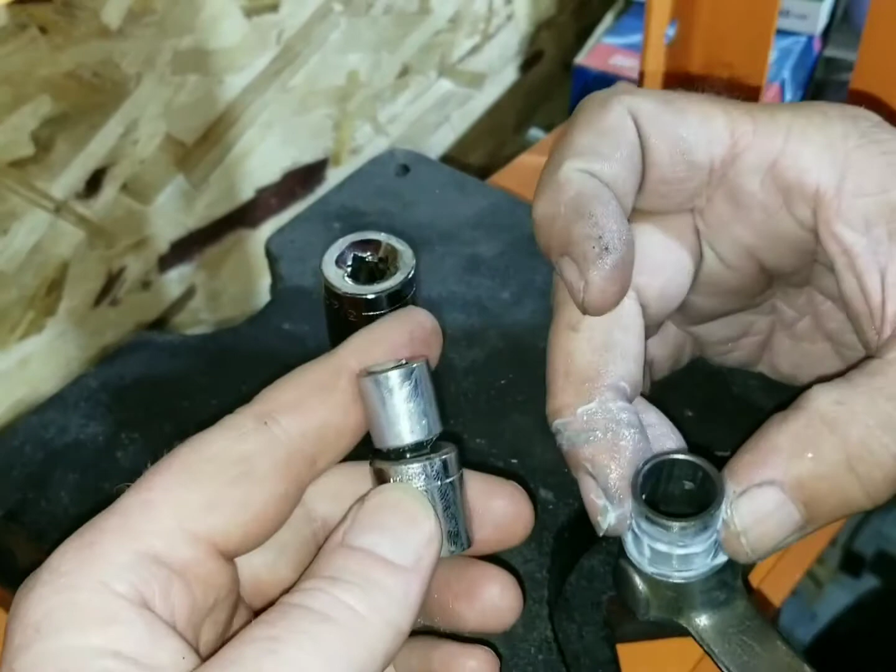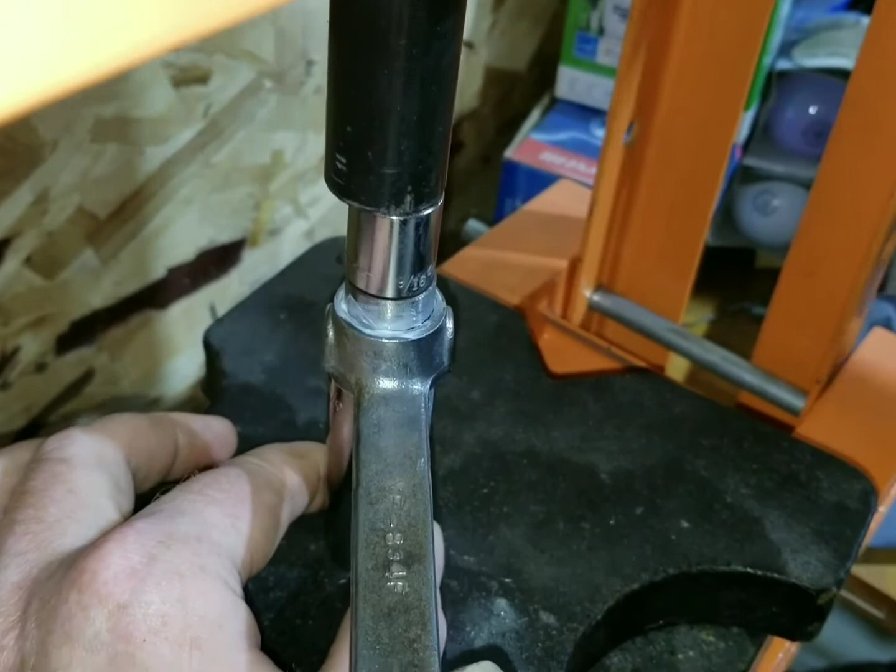Alright, so like I was saying before, we put that adapter in there so it can easily fit inside and keep it from moving all around when we go to press it in. Close there. Get it centered in there. I want it centered in there. There we go, bottomed out. Pretty good, huh? Yeah. Alright, cool. Well, stay tuned.

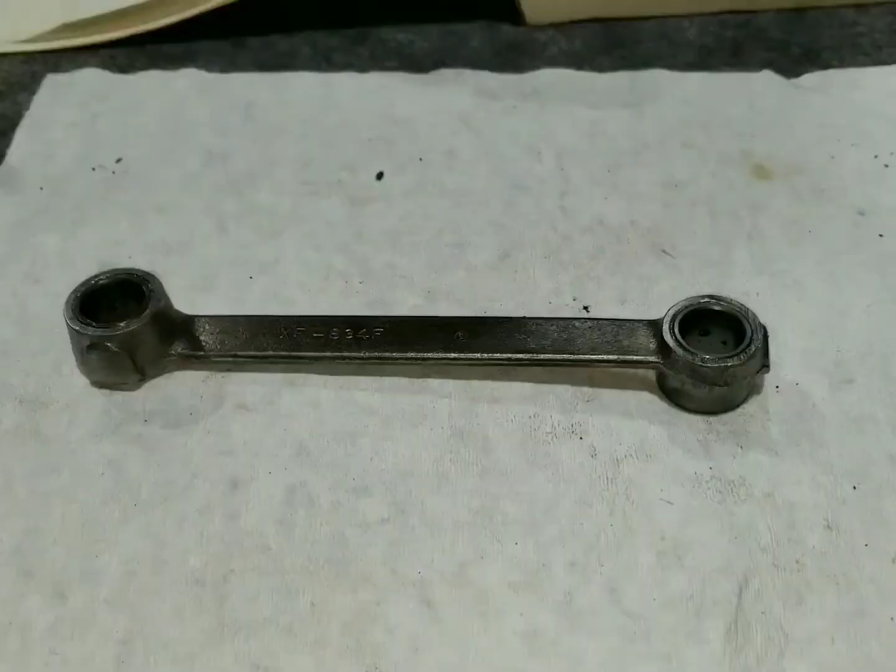Alright, so this shackle's ready to be painted. Just got done cleaning it up with the wire wheel and pushing the bushings in and everything. It was originally painted a gloss black finish, so I'll try to do that. They weren't originally chrome plated or anything like that. Like I was doing before in my front fork video, it was a black front end, so of course it's going to be a black shackle and black front brake, like original.

So I'll just check the clearance here on our nice new bolt, and there we go. Goes right in, and hardly moves. Yep, so we should be good there. And these bushings have 4 holes in them, so they get a lot of grease in them that way. So yep, looks good. Stay tuned.

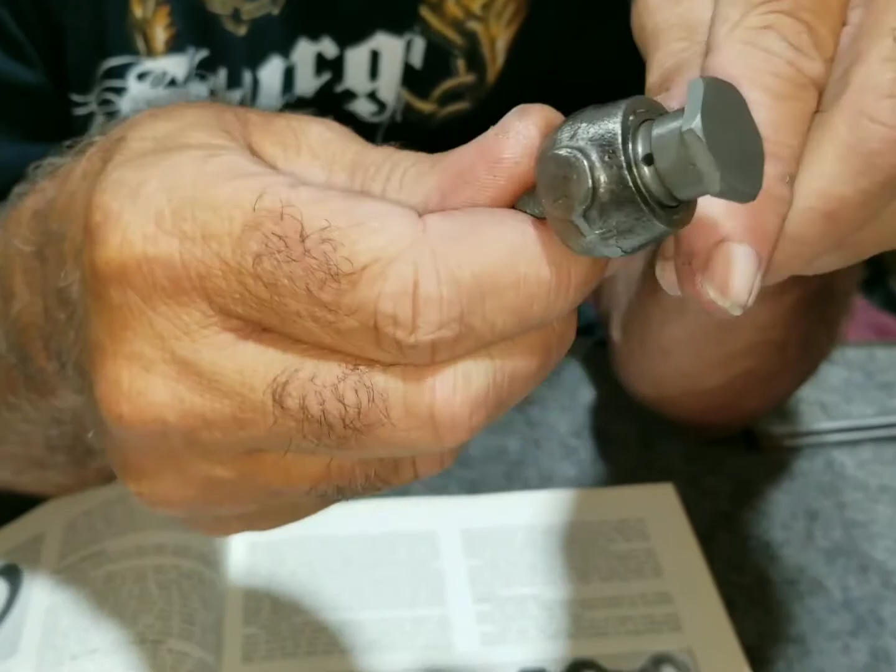All right, so here we go. Here's the shackle back from the body shop, just got done getting painted. My original shackle, nice and black again. It's a narrow one, like I was saying earlier, and it's got the casting numbers and letters XF-834F, and it's ready to go on the front brake.

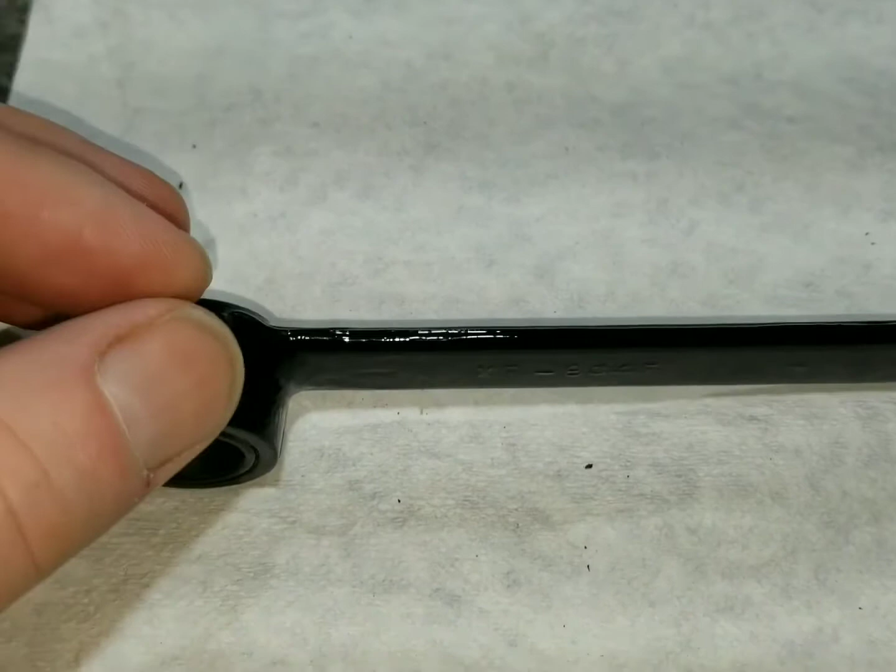But I'm going to put the cadmium plated grease zerk in this thing. Start it here right now, and then when we get it on the front brake backing plate, we'll tighten it up the rest of the way so I have some leverage. So there it is, ready for the front brake assembly. Pretty excited about this. Stay tuned.

So let's finish up this front brake assembly as much as we can right now before putting it on the bike. Here is the shackle ready to go on, and here's the rear mounting bolt that hooks through the front fork, then a lock tab washer that locks it to the front fork and keeps it from rotating, then the coupling nut on the front that locks it down, and then the grease zerk.

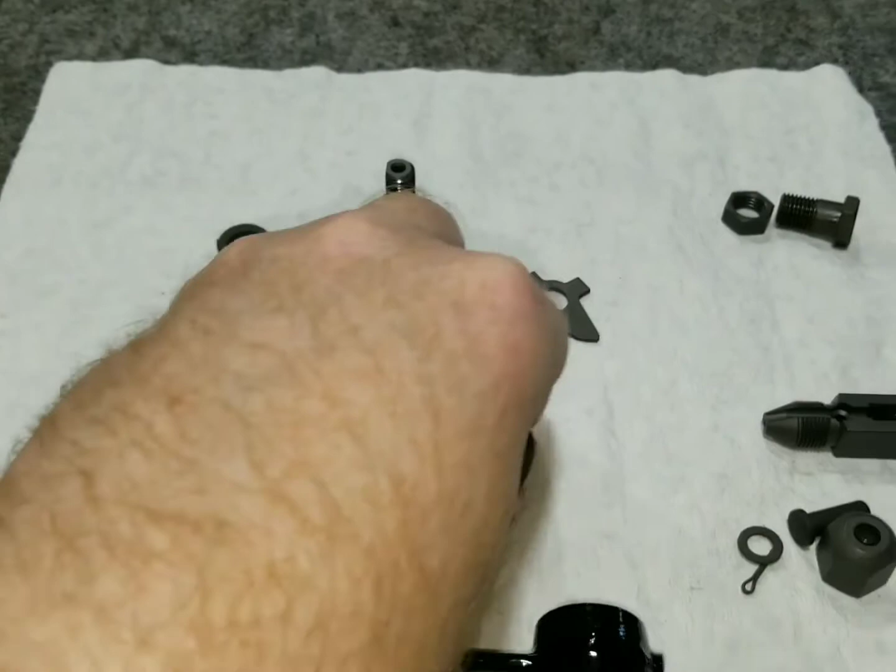So first off, I'm going to put the grease zerk in, and then we'll work on putting it all together. I'm going to use 2 hands here, thread it down, and tighten it with a wrench. So stay tuned.

There we go. We just got done tightening this up. I was really careful with the wrenches holding it. I don't want it to get all marred up, so I took extra caution tightening this together. I hate it when you slip off one of these things and you're trying to make all this hardware look nice and neat, and then you get a big old rounded edge on some of this stuff, and it's unattractive. So anyway, this turned out all right.

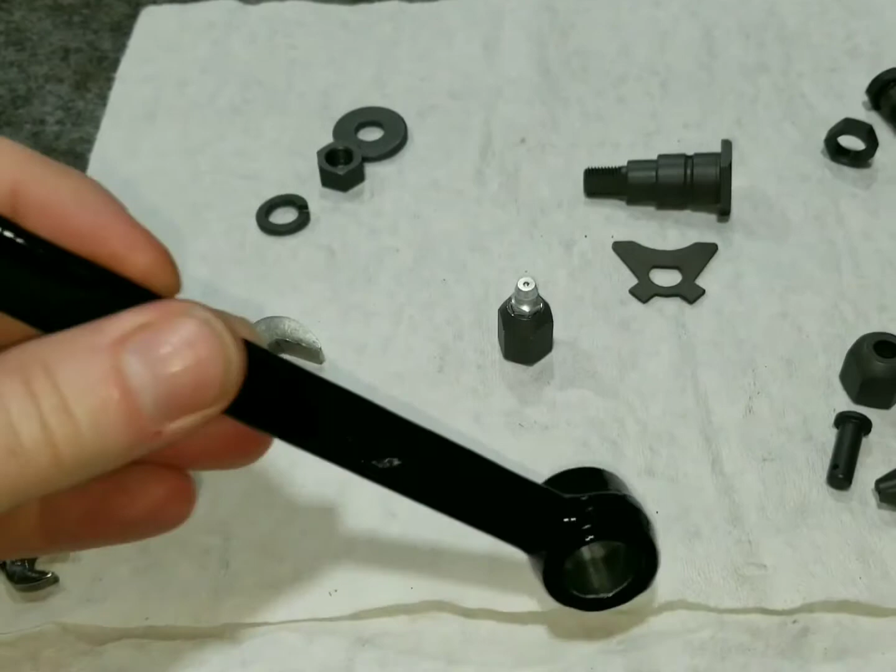So let's work on getting this shackle put on. We'll orientate the shackle like this, because that's the way it goes on the backing plate into the motorcycle. So we've got the zerk going up, and that puts this edge out, and this one inward towards the wheel. Then we're ready to put the rear bolt on. We'll just be attaching this bolt loosely for now, because of course we're not mounted to the front end yet.

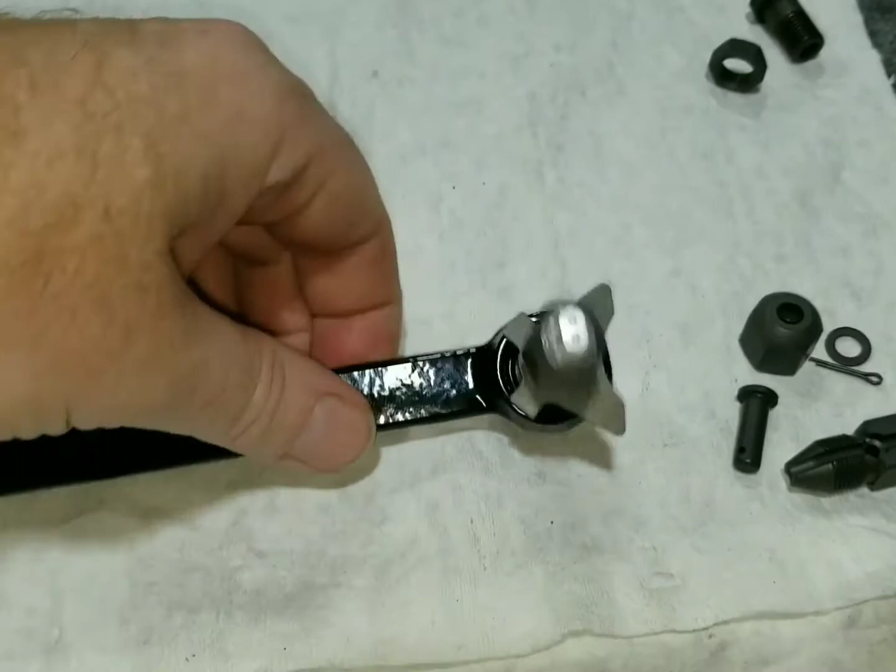We'll run this lock tab washer on here, that way we don't misplace it in the meantime, and make sure we put this on the right way, because it has the machined edge on this hardware piece too. There we go. Then we'll just put it on the backing plate here. We'll take the flat washer and put the 90-degree edge, the sharp edge, towards the item we're tightening, and the rounded edge outward.

And then this Colony reproduction nut, we'll put it on the right way, the machined surface inward towards the item we're tightening. Colony does a really good job of reproducing the original style Harley Davidson hardware that they used to machine back in the day, because they only had their own machine shops back then, making their own nuts and bolts. It wasn't until later in the 40s that they decided to outsource some of their products to a company called Chandler Products.

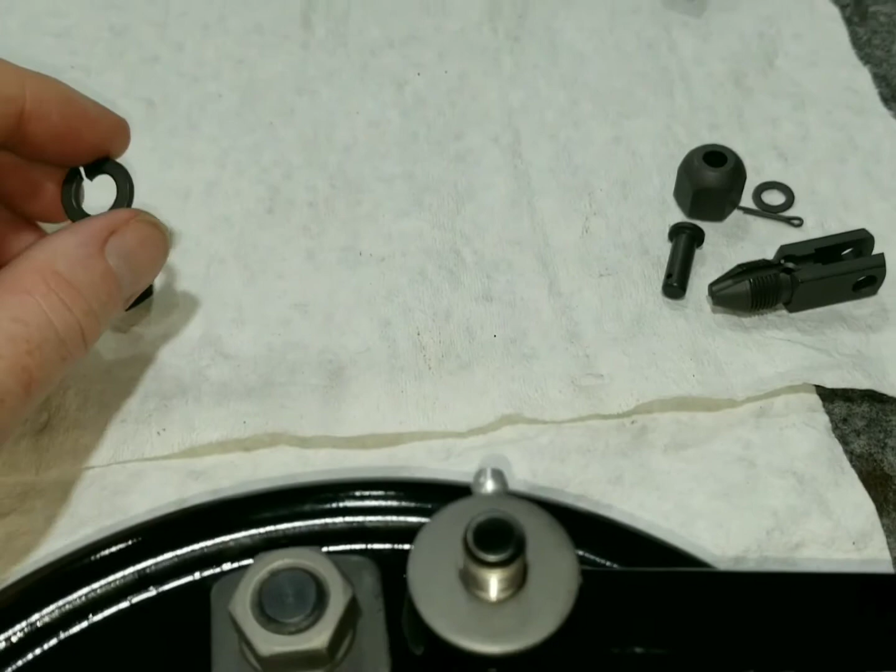So after the flat washer, we put the lock washer on, and then that nut. Make sure it goes on the right way, like I was saying. There we go. Like that, and then we'll just work our way down. So we'll move over here to the cable connecting unit.

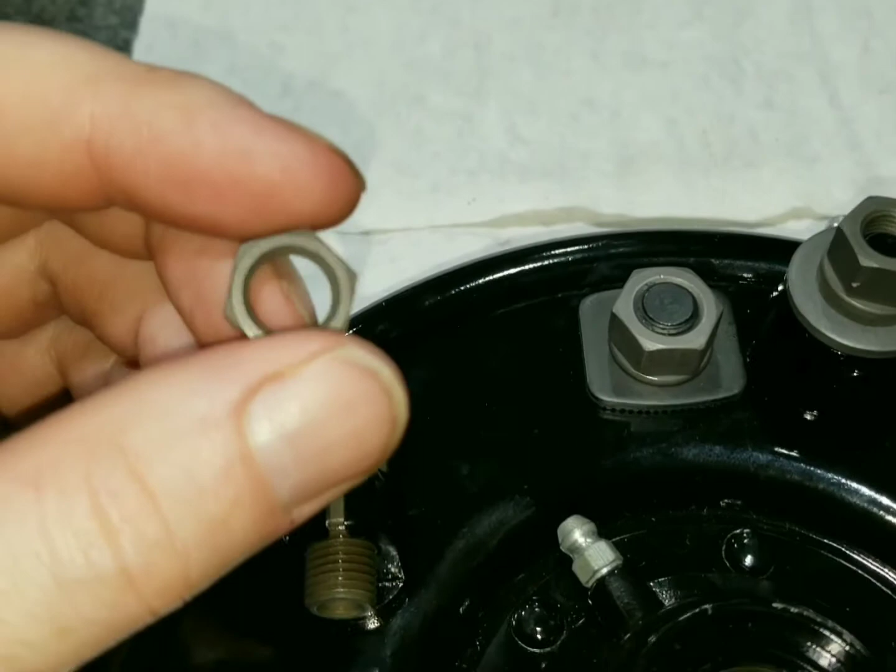The cable threads into this piece, like I mentioned earlier in the video. This is going to be loose for now because we're not putting the cable through yet, since we don't know where this is going to end up when it's tightened. Then we'll put the nut on, leaving it loose, just so we don't lose it, because each nut is a special size and dimension for each area. Machined edge in. When we have it all set up, we'll put a wrench on the top and the bottom and sandwich it together, and it'll hold it still.

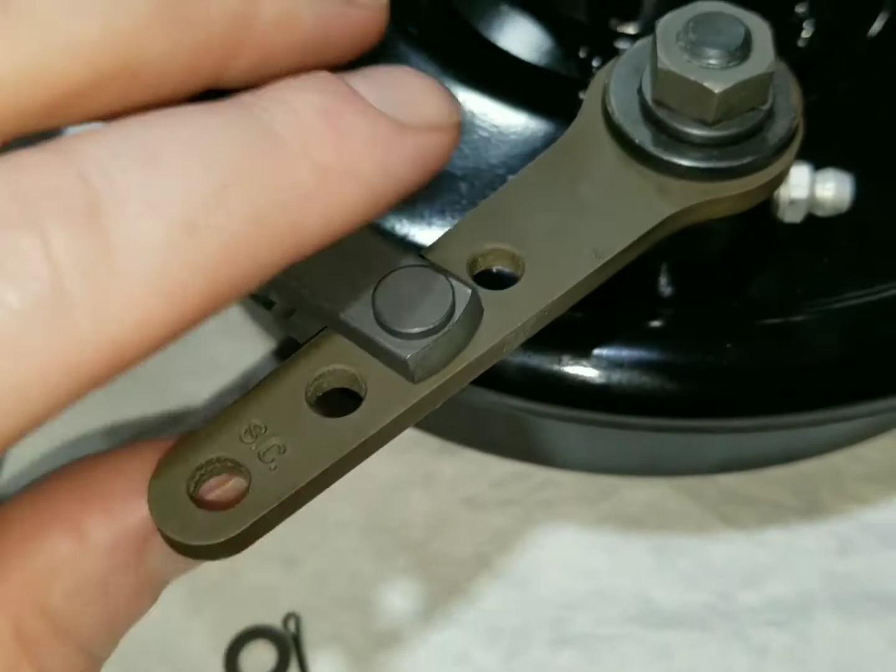Okay, so the cable comes through here down to the lower connection unit. For the lower connection unit, we're going to set it up for the standard solo. I'm going to put it there; I can always adjust it later. The cable comes through here, wraps around, and gets held down by this nut on top. We'll pin it with this, then put on the flat washer and pop the pin in. Make sure the sharp edge goes towards the clevis and the rounded edge is outward.

So stay tuned here. There we go, I ran the flat washer up on there, rounded edge outward, and pushed that cotter pin through. I didn't fold it over yet because I'm not sure where I'm going to leave my adjustment. I don't want to mess up my cotter pin until I know what I'm doing. Still deciding what setting to put it at. I've seen it a lot of different ways, so we'll go from there.

Next, we're going to just thread this on for now, because we run our cable around this thing, but I don't have the cable on yet, so this will keep me from losing this piece. There we go. This pretty much ends this segment on the front brake assembly. This is what it looks like when it's all done and ready to go on the bike.

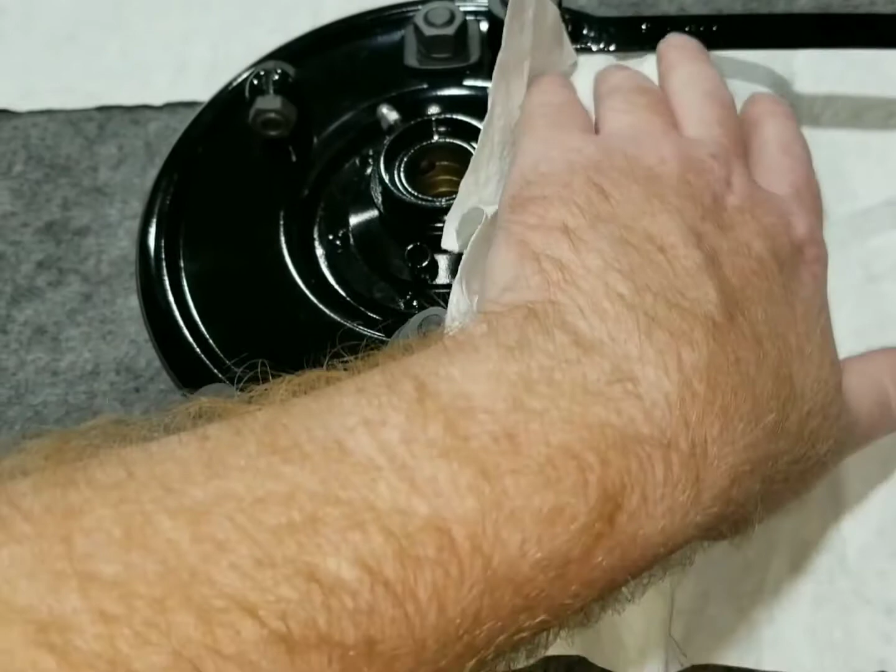So hope you enjoyed this. I've got the rear brake to do yet, another brake system, and then I'll be ready to put this stuff on the bike hopefully soon. In the meantime, I'll protect this and keep it covered up so stuff doesn't bang into it and chip the paint. Like that could have just happened.